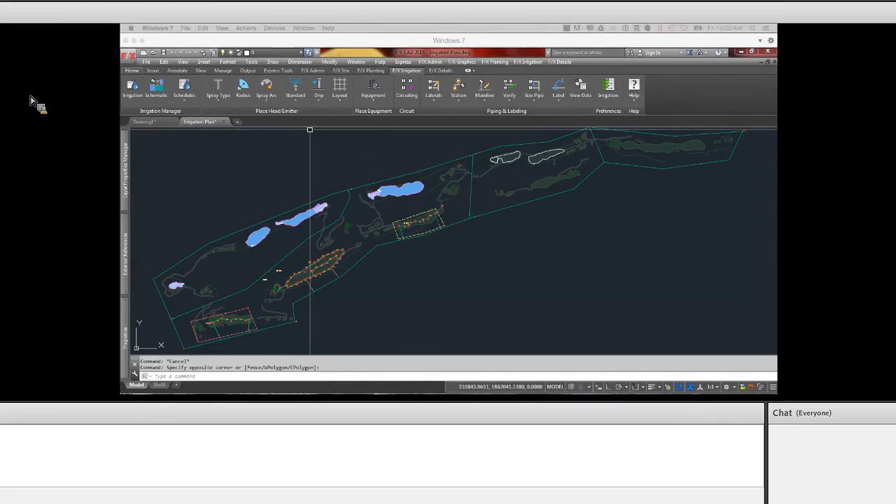Hope you are ready for an exciting webinar on golf course irrigation. So we have a lot of fun things to show you on how Land F/X can handle golf course irrigation. I see a good collection of skilled designers here ready to watch.

I really appreciate you guys tuning in and sharing with us, because of course we do require a lot of input from y'all. We have the notable handicap of never actually designing a golf course irrigation, so it's been a lot of interacting with designers, and when you have someone right in the same room with you, there's so many hundreds of little questions that are really necessary to really fine tune it. So I do want to throw that out immediately that we're definitely going to be improving this even more, and we do need a lot more input from you.

But this is definitely representing a number of years of continuing to add on to our irrigation capability with the tools specific for golf irrigation. And as a lot of you know, it obviously does fit the bill, but we're going to really showcase the combination of tools and how to use them and how that all works. But do feel free to chime in with little questions there.

I'll be here. I even have a good number of golf jokes teed up. So as there are moments where Jake lets me, I'll do that. But enough of that, take it away, Jake. Awesome. You can hear me, right?

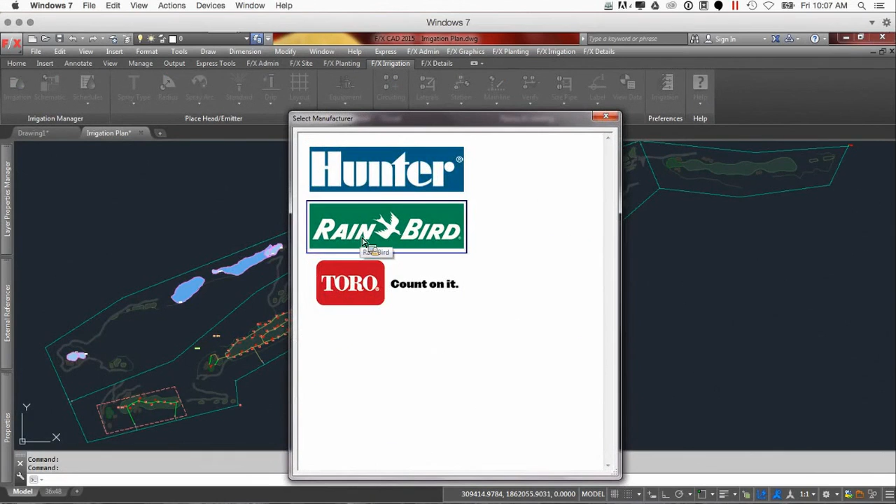So we're not going to go over exactly how to specify things. I think who we're talking to now completely understand what they've got to do in regards to that, but being able to have the power to come in and choose our valve-in-head rotors and specify the actual manufacturer and see what they have available for your golf course design.

And just like everything else, being able to click through and find the specific model that you need and go right to their website and right to their catalog for this stuff. Just bringing that power right to you so that you don't have to second guess anything as you're placing the stuff that you're looking to do.

So I've already added a couple of things here, so we're not going to add any new stuff, but we do want to obviously think about everything that we're going to need for this system. So being able to know that we're going to use valve-in-head rotors, putting those into your plan and placing them into your drawing. Land F/X sees those and starts to treat different tools differently, and we'll go through that as we talk about our lateral piping and shutoff valves.

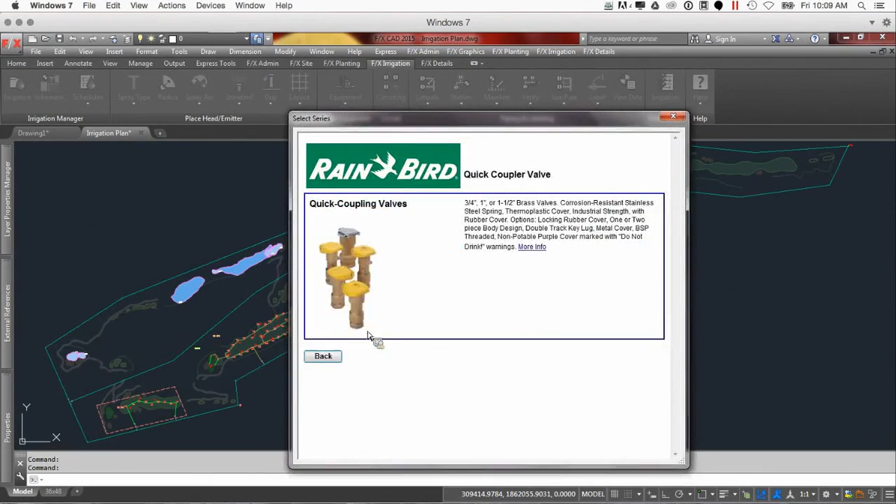But just know using those valve-in-head rotors does open up sort of this golf irrigation design door for the system that it wouldn't normally do. So definitely want to have those in our drawing. When we talk about valves, we can obviously add a quick coupler. I did not add one of those, so we'll just go ahead and choose one of these guys here, not too worried about what kind it is.

And then obviously we have the ability to have shutoff valves. And the shutoff valves are super important for this design, not only pertaining to maintenance, because when you're a greenskeeper or the person out there doing the maintenance, shutoff valves are extremely crucial, especially when you're breaking up this type of a main line and this loop system, being able to shut down pieces of the site without affecting the rest of it.

So understanding the need for these shutoff valves, and not only on the maintenance side, but actually as we get into sizing the main line, being able to toggle those on and off. You'll see the ability to have it open and closed, and what that actually means for the system and how the system recognizes that. We'll go over that a little bit more in a second, and then obviously just choosing the actual valve that you're intending on putting in.

So from there, we have our auxiliary equipment. We can add our controller if we have central control.

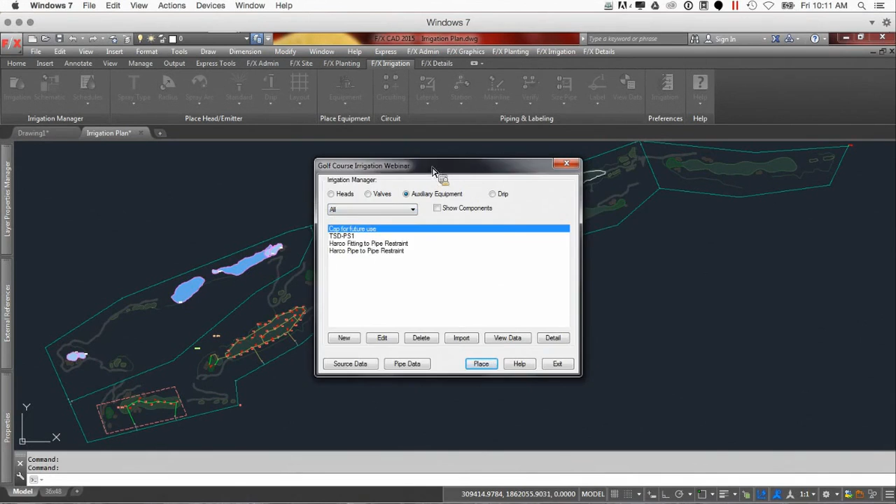Something Jared and I were talking back and forth about is we're going to show you how to use a combination of schematic irrigation and using caps in those first initial phases of your design. So you're not necessarily placing everything right up front, but just to give you a sense of what that main feeder loop is going to be handling and how we're going to size those things. Hopefully we can put a couple thoughts in your mind about how to do that.

So I've added a cap for future use so that we can place those around the drawing. I've got my controller, and then adding pipe restraints. So we have those restraint fittings, and you can see that we've got...

Right here, joint restraint fittings, and if we click new, you'll be able to choose from these three different options: fitting to pipes, and then valve to pipes. Depending on the scenario, I might suggest adding each one of those to your project, because you're going to run into different scenarios throughout the system that you're going to want to do.

I've just added the fitting to pipe and pipe to pipe just to show those off a little bit, but obviously showing components right off the bat, you can see what kind of options we have as we are connecting to fittings. We have the ability to hook them to T's, to 90s, to 45s, and then a couple smaller angles based on Harco's availability. So there's those guys, and then obviously pipe to pipe type of fittings connections there.

Jared's done a really cool thing where they actually get integrated into the main line, and they recognize, so you can pipe to them and fit them within, so they're recognized. We'll go over those a little bit more in a little bit.

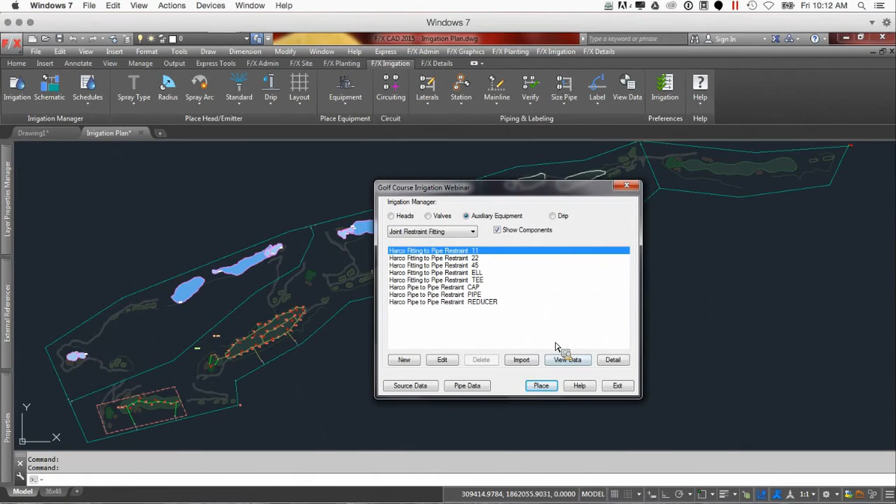From here, let's just go over what I've got thus far in the project so you can get a sense of what's going on. We've got our point of connection up here. We're just pulling off of a well, and I've got an entire looped main with a couple cross connections here.

So at each of these points, I have placed my gate valves so that I can turn off any one of those at any time. I haven't placed them here just so we can place them.

Right off the bat, I am going to place some of these so that we can see. We can place them either open or closed. You'll notice that once I click it onto the main line and set it on there, it recognizes it and it actually hooks it into the system. So it does weld itself in right off the bat, which is actually pretty slick.

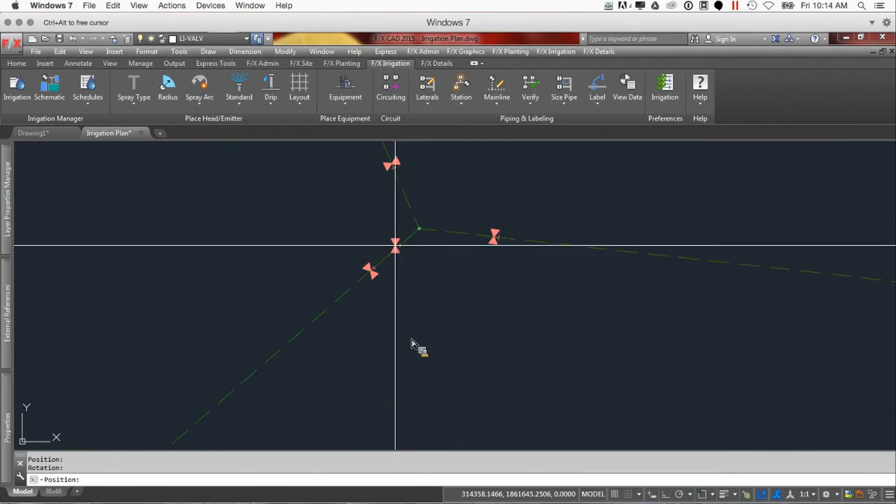You don't need to place them first. You can actually place them afterwards, and they will hook themselves together. So that does make it really, really nice. We can place a couple up here and just get them back into that system, making sure that we have all of our connections there.

You'll notice that I have placed these gate valves not only on mainline, like our actual main feeder line. But you'll also notice that I've got gate valves going to each one of these fairways. And the really, really cool thing about this, Jared, you can explain it a little bit more.

I'm going to do my best shot at explaining how you explained it before, but the system doesn't know exactly what you're intending to do. It does not have eyes, and it does not see that visual representation that this is a sub loop and you're trying to size this a little bit differently. It only knows the difference between mainline pipe and lateral pipe.

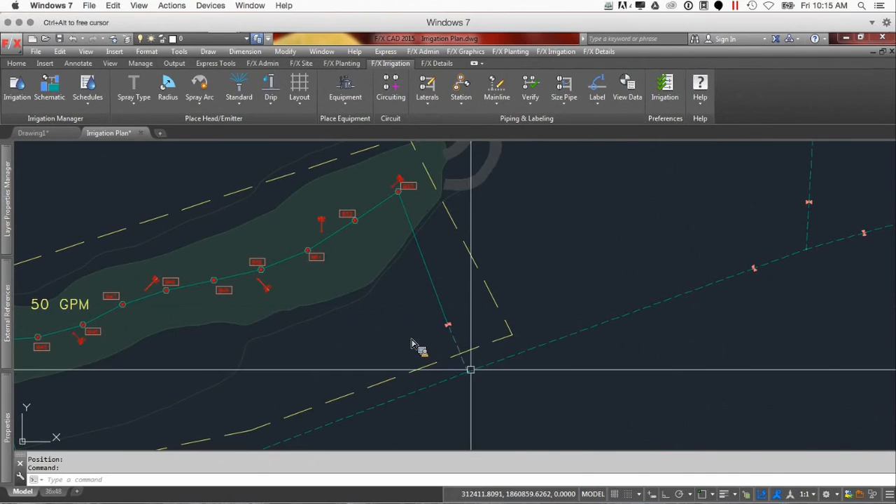The way that Jeremiah was able to figure this out, or let the system figure it out, is pretend like the system was blind and using Braille. So it's feeling along these main lines, and it will feel these different gate valves, and it'll feel just past them and see that it's actually different material, so it'll actually stop.

Because what it doesn't want to do is take out all instances as it's sizing these lines and continue to go through these unnecessary paths. So it's actually stopping at these certain points and then doing different calculations within the system and placing them at a point where it can grab that information and send it back appropriately.

So it's actually really, really cool, how it's actually processing through that.

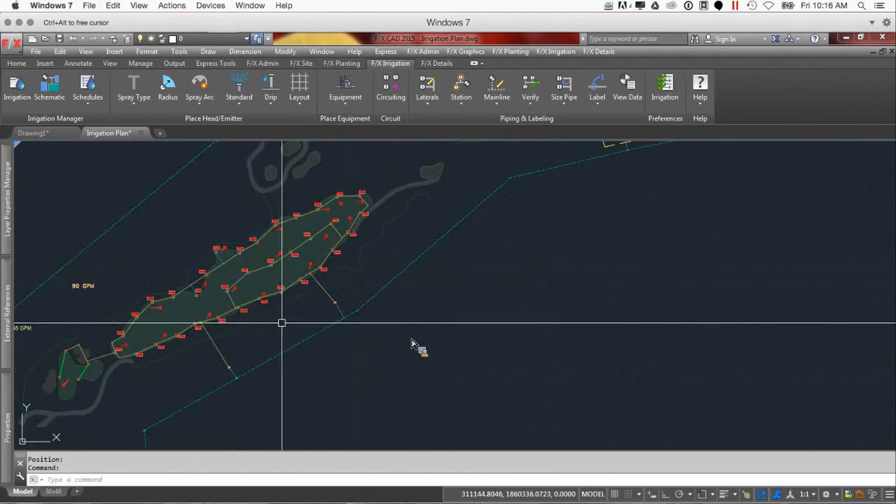So making this irrigation design as we would normally see it, where we've got two main feeds into this subloop here, we've placed all of our heads and connected them to lateral lines. We want to make sure we put gate valves or shutoff valves in our two locations so we can split the flow accordingly.

So I am going to leave that at that. Jared, do we have any questions up until now? So far. All right, cool.

So we're going to drop in a flow zone here. I've already put one in, but I'm going to show the power of these things just right here real quick. So to get to our flow zones, we're going to do that in our sizing mainline tool.

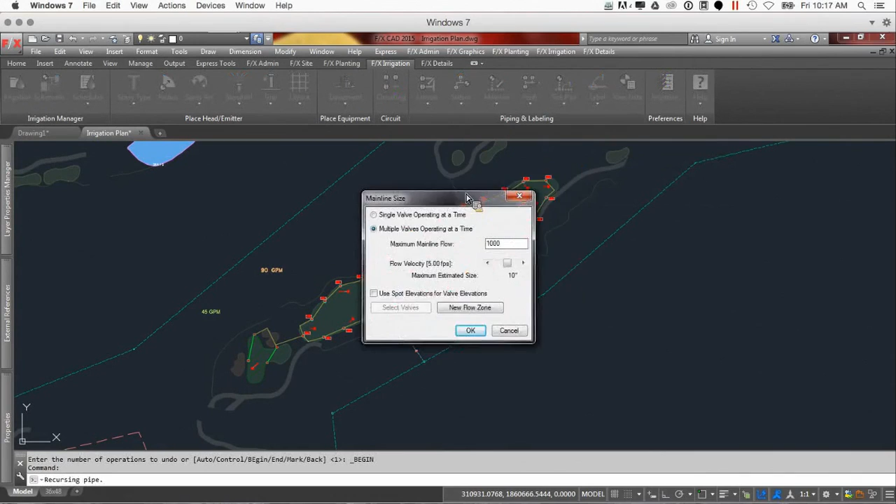When we go to our size mainline, we're going to have the option to select a new flow zone. What this flow zone does is let you put the max flow you want to limit this area to. Flow zones do not create flow, they only limit flow. And a step above that, they actually only limit flow if the flow in a given area exceeds that of your flow zone.

So if you have an area, for example this right here, that has let's say 30 GPM total in it, and you put a 45 GPM flow zone around it, it will not touch that. It'll size accordingly to what your flow is through those pieces of pipe. So we only care about what the maximum flow is for a given area that you want.

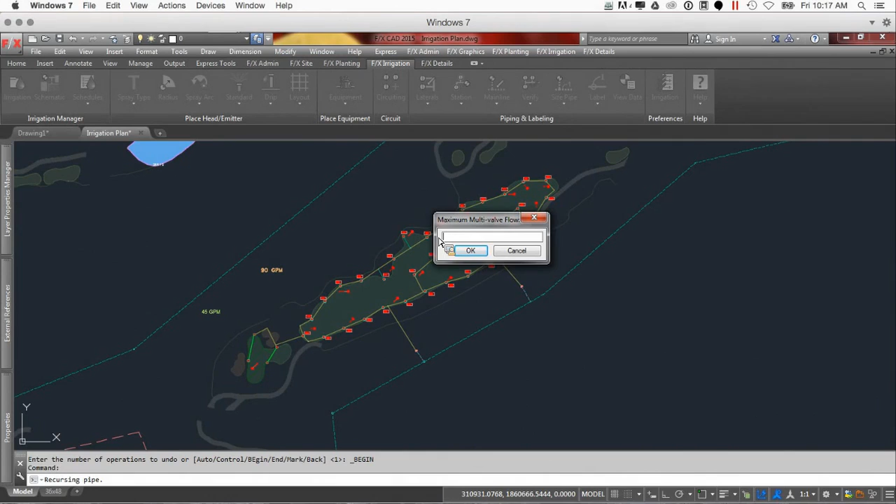So we will do, I'm just going to copy the same thing. I'm going to say it's a 90 GPM flow zone. And you need to make sure you encompass everything you want included in this.

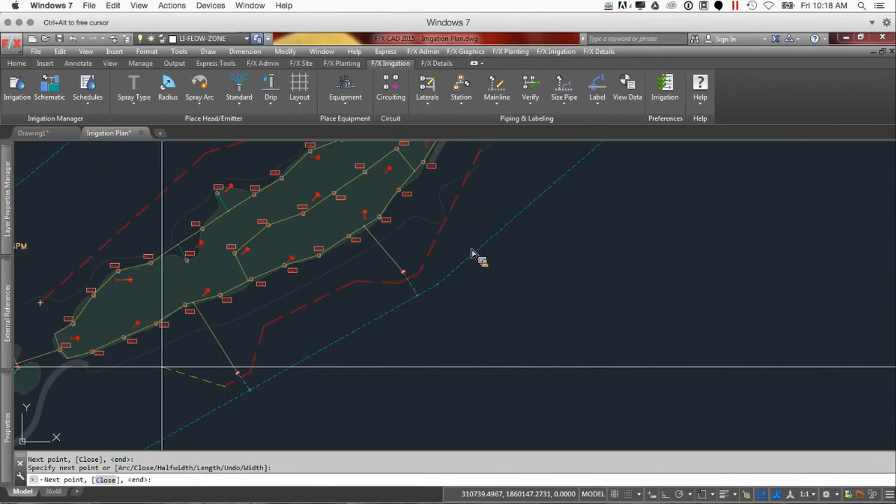What the flow zone is going to look for is both the end points of a pipe and the midpoint of the pipe. So as we come down into this area where we want to include, from the gate valve up through, but not necessarily our main feeder line, we can simply come around it just like this and include the entire length downstream of the gate valve, making sure that's all included, but just simply go up through and not include the rest of that main feeder line, and you are good to go.

So if I come across it this way, you're going to see that I can close it off, cancel so we don't size the line, but you're going to see that I got now a 90 GPM for this area. I'm going to do one more flow zone, we're going to give it 45.

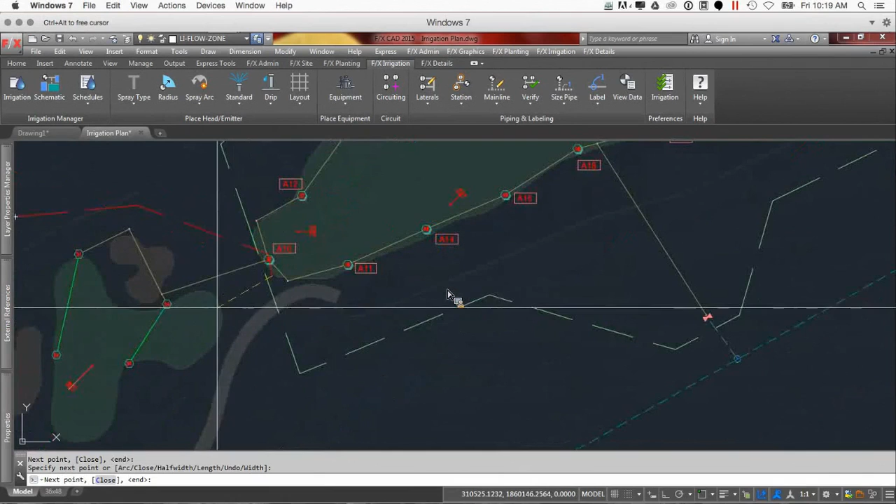And for this one, I'm actually going to do the opposite. You really don't want to overlap flow zones other than including some of the similar areas, but you can cross through enough to where it's actually recognizing the pipes that you didn't hit with the last flow zone.

So you'll notice that my 45 GPM flow zone will include this connection lateral or this connection main here, but not include the pipes that are within the other flow zone. So it doesn't matter that it's crossing through heads, but you can actually see if I select this, I've encompassed the entire 3 points of that line, which means it's going to be included.

So you do have to be a little bit cautious and meticulous about how and where you're placing those flow zones, but it does make it really nice that it picks up only what's within that entire area.

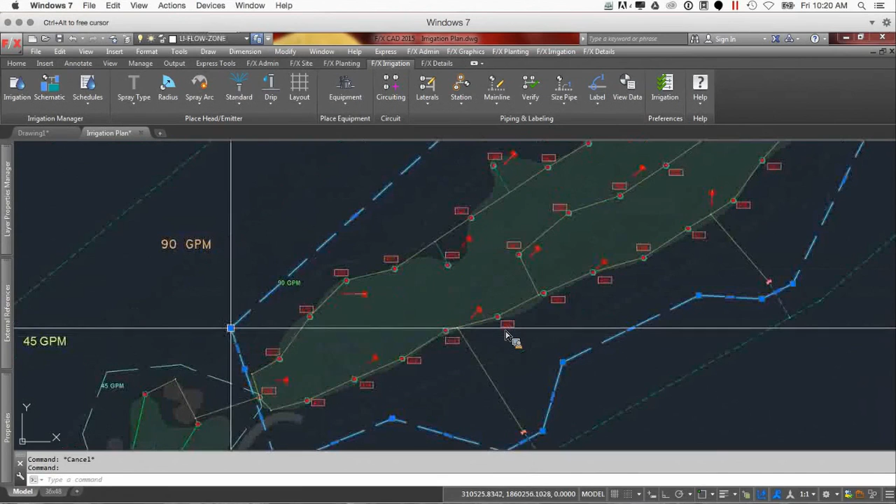So you are free to move these around however you see fit after the fact. Another really cool feature is that you can just double click into that text and change this to whatever you want it to be, and that's its new flow zone. So you don't have to worry about starting a new one or deleting this one to change it. All you do is come in here and change that number to whatever you want it to be, and you're good to go.

So now that we have our flow zones on here, the system's going to recognize that regardless of how many heads we have in this area or the total flow, we are going to limit it to no more than 90 GPM at a time.

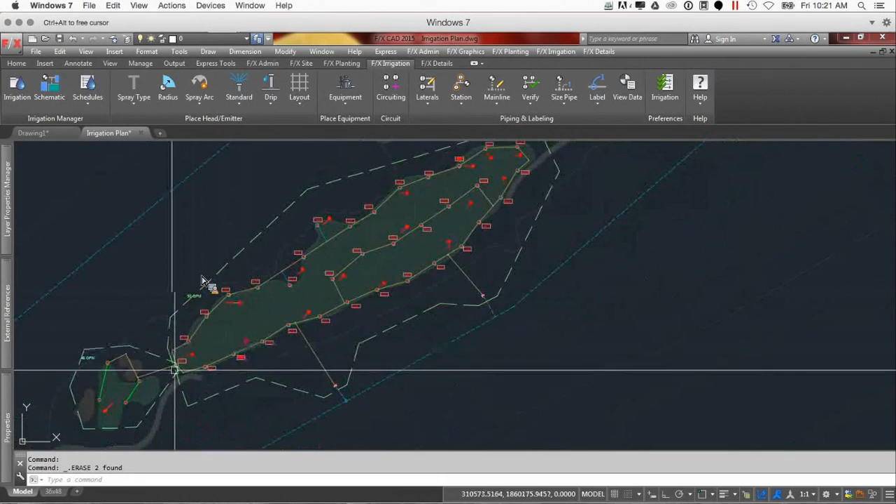So I can actually use my View Data button. I can click on one of these heads, and this is something that's probably already known coming into it - what type of head you're using, how much flow is going through a typical head, how many I can usually run at a time.

But now I can see that these are going at 23 GPM. So now you can start to think about how many I can actually run up until 90. So I'm breaching the 4 or 5 mark here. We know that at any given time we'll be able to run up through that many.

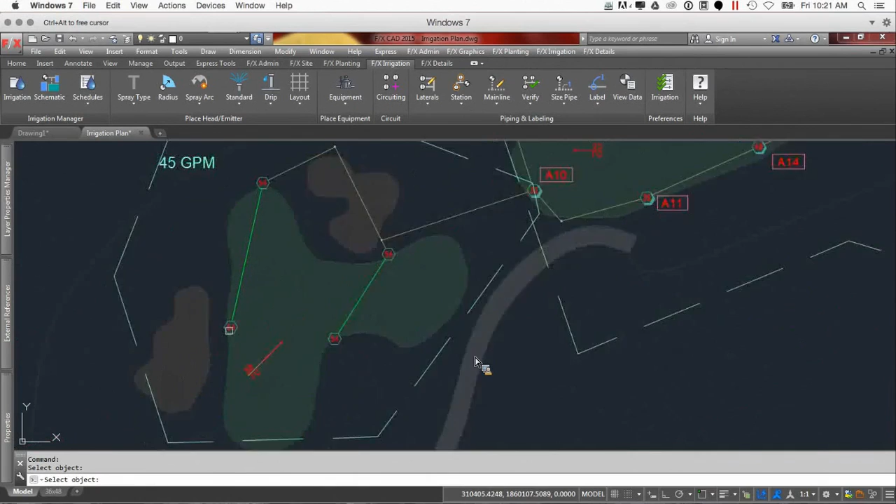So a 45 flow zone, I got 31 per head. As the system looks at this and adds the next one, that's already breached the 45 flow, so it's sizing it to only run one at a time here. You can really limit and force the pipe to be sized accordingly, and then we can worry about how those are going to run later down in our schedules.

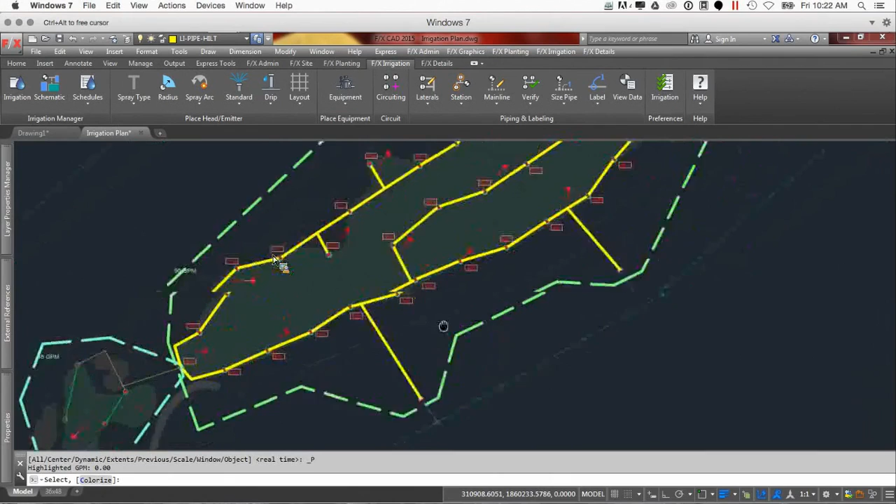So I've got my flow zones put across the heads that I've placed already, and the other feature of that flow zone - using the highlight station tool, you can click on a flow zone and it'll show you what's included. If you're ever worried about what's actually included in instances like this, simply click on that flow zone and it will highlight everything that is included. It makes it really nice for a quick check to see what you got going on in there.

So from here, we're going to talk a little bit about placing a couple heads so we can go over the difference between mainline and lateral line here. I'm actually going to place it from my rotors, and you can see that I got all my different nozzle choices.

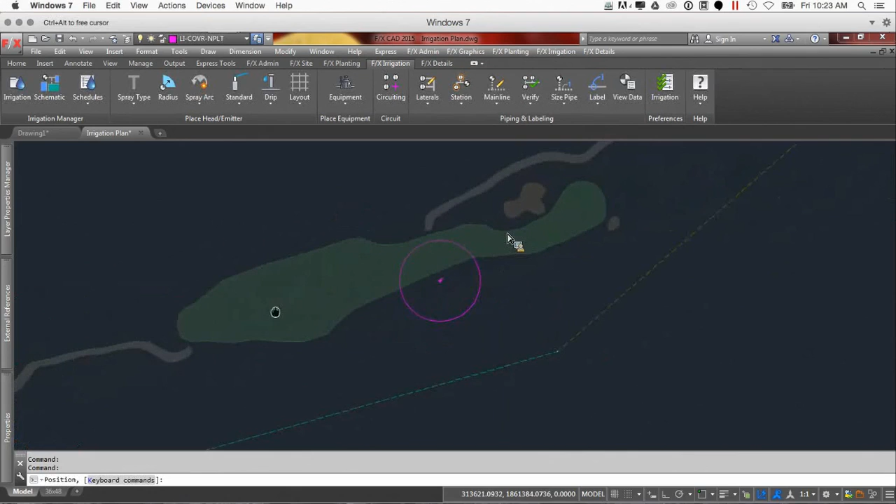This specific one - these are all fulls here - so I'm just going to open up this guy by double clicking, and you'll see that I'm given that nozzle choice. Using my Q and E buttons, I can increase or decrease that nozzle size, and A and D to decrease or increase the radius, which are some of my favorite buttons.

So we're just going to choose - forgive my awesome design skills here - but we're just going to really quickly do a one row design across here by quickly placing them.

The other thing to think about, as we're going, just general rules of thumb - think of this design stuff just like you would any other type of irrigation system, and zoning is definitely crucial. Being able to water the greens different than the fairways is something that should be thought about. Head placement is definitely different when it comes to that.

So I'll grab a different type of head that I can actually do some varying arcs on, and simply place them here and around the greens so that we have somewhat of a better representation of how that would go. So we'll just place a couple more.

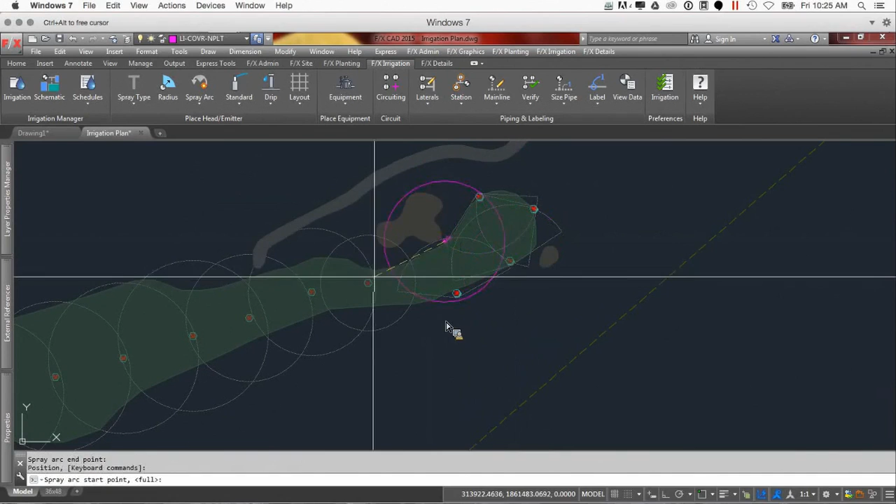So now essentially when we've done this, we do have to consider our flow zones for these different areas. We want these potentially running at different amounts, so we could place our flow zones as such.

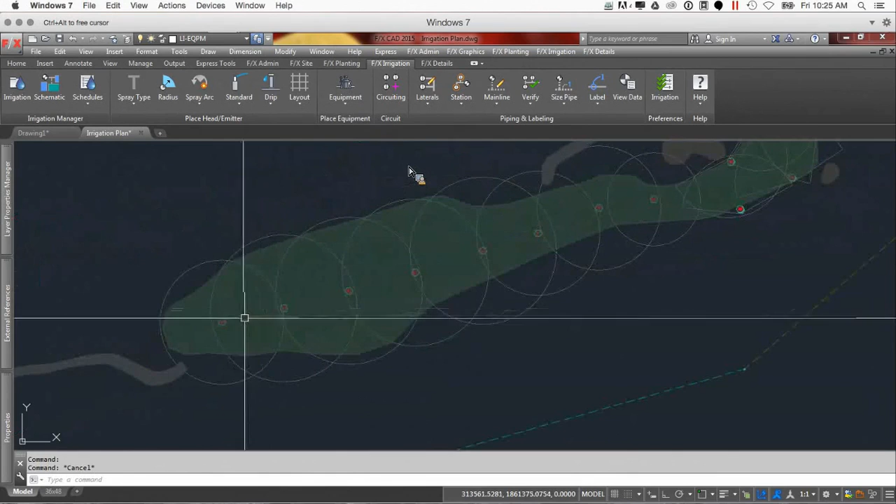We're going to just pipe really quick. One of the cool features - as you place that valve-in-head rotor, you can actually use lateral pipe to hook these heads together, and it will be considered mainline. So we'll just use our lateral pipe function. I'm going to go from here, and cheat a little bit using the H command to have head snap on, and just drag across all these real quick.

So when it comes to an area like this, we can figure out what we want to do. I'm going to just pipe around to it a little bit like this, and we'll pipe back onto it.

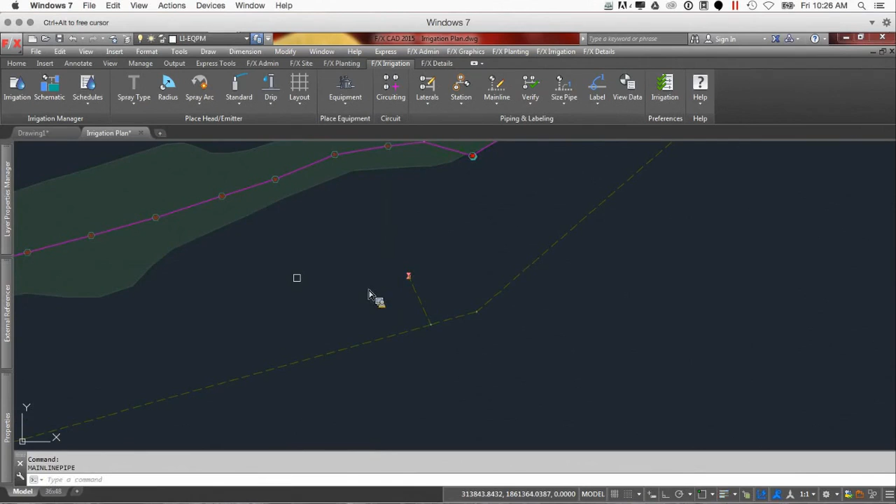Now we're going to have to put in our gate valves here, so I'm going to plop on some gate valves really quick - I'll place one right here, and one right here. When we pipe this stuff, we want to bring our mainline into the gate valve, and that's going to be able to assign that gate valve that threshold or gate into our lateral connection here. So the system's going to see that as different once we actually connect that. And I actually missed the mark there.

And connect it in. So from that point on, the system's going to know to treat this a little bit differently and overlook it for the main feeder line. So we're going to connect that last one in here, and we'll bring him in.

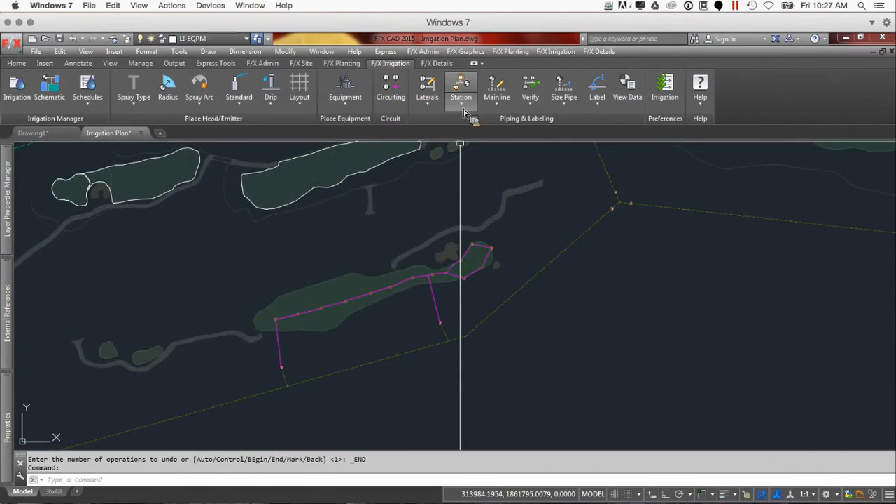So now when we highlight this station, you're going to see that it only highlights up until those gate valves, which is pretty slick. It'll show the main connections in blue, in cyan, and if you highlight the rest of the line, it's going to bypass those sublines and treat those a little bit separately. So it's just an awesome cross-check there.

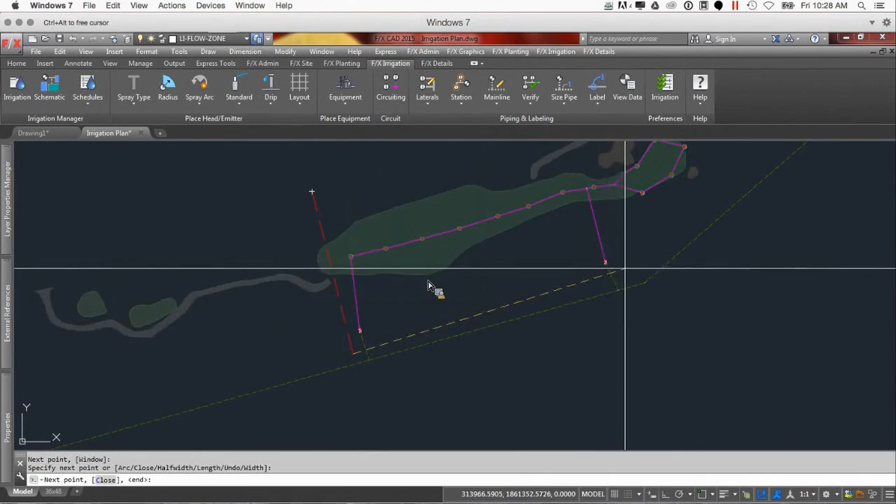So from this point, we can drop in our flow zones if we'd like, size our main line, choose flow zone, and based on the parameters given, we can assign 150, and include this entire thing. I'll give that one 45, and we'll just drop one here. Again, keeping in lieu of this, we'll just go around that guy. So now I have my 2 additional flow zones.

So we could stop here, but for time's sake, I'm just going to keep going unless there's questions. All right, cool. So what I've done for schematic, we just showed placing those heads, how to use the lateral pipe command and stuff like that. But what if you didn't want to place all the heads yet?

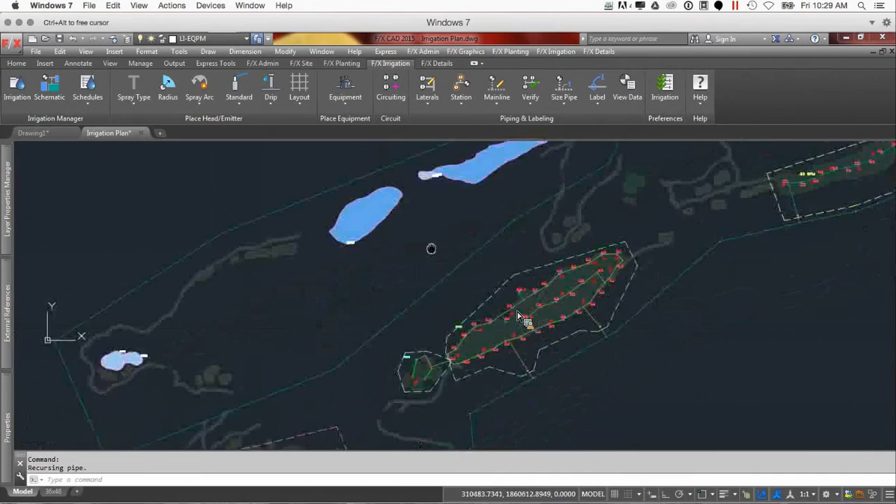We came up with a slick little way to at least account for some stuff. I obviously ran a valve schedule to see what my precip rate was for these given areas, so I had a relative precip rate I could use. Our schematic areas allow you to add different irrigation zones. So I added a couple different scenarios, depending on how I wanted to water the greens versus the fairways, and whether I wanted a couple rows of sprinklers versus just one row. I've got him with his specific precip and a set pressure, and I've done that for just a 1-row as well.

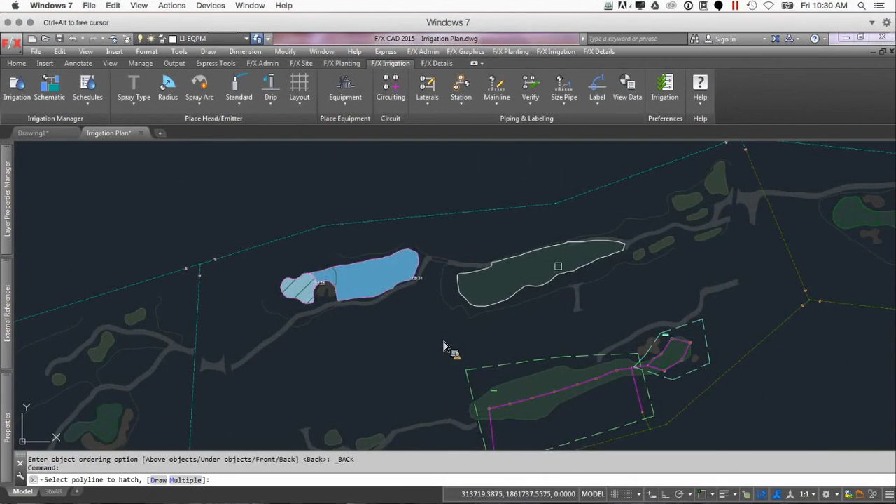So I can now go ahead and place this stuff in these given areas, and it should respect that and drop in a flow. So now if I come into these bigger areas, I can grab my other guy and go ahead and place him. Without clicking any more than those 3 times, I can start to get a sense of how much flow is going to be required for these areas. So that alone is pretty cool.

But now how do I turn that into the ability to size my main lines accordingly? Since schematic is not recognized without valves, we can't just hook this to the main line. However, we've talked, and it would be kind of a cool feature, so I'm going to let that up to Jer's brain.

But what we're going to do is actually place a cap. So we're going to come up to our equipment and place one of these caps. This cap, and caps also won't be in the valve schedule or the runtime schedule, but what it's going to do for us is it's going to be pretty much like a flow zone. So the cap isn't going to reflect the entire flow of that area—the cap's going to reflect what the flow zone for that area would be.

So for example, I'm not going to place it yet—let me show you this little nifty trick. With highlight station, if you highlight this sub main right here, it's going to show us what's all connected, and you'll see down here in the command line the total GPM for that area. So we can start to get a sense about what's going on through that area. I got 910 GPM going through there.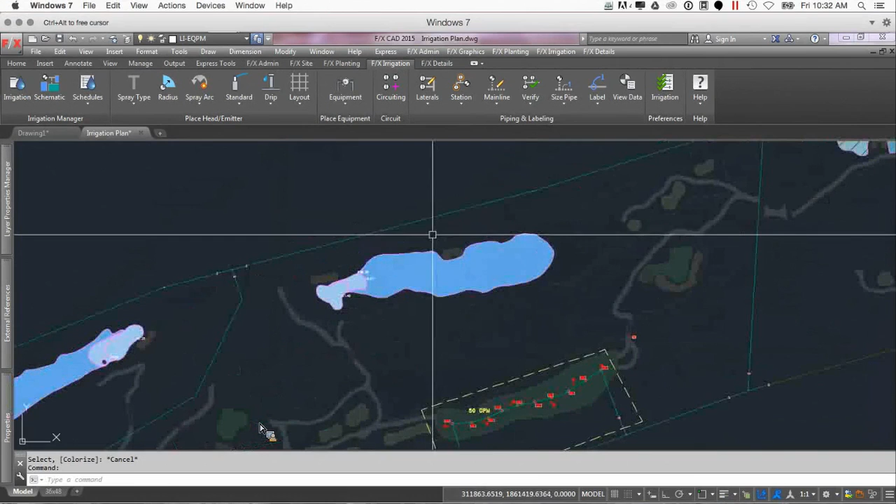So as we look at these different areas, we can start to get a sense of if we're close to the same, what my flow zones were for that area. So I'll stick with the same or similar flow zone amount.

And if I just simply place them in here, since it's not going to matter, we're not doing a looped here, we're just connecting from our main to this cap, I can actually place them just outside. That should be okay. But we'll go 85 for our flow zone here. And the pressure we'll set at whatever the design pressure is for that type of head, and we'll place them in. From here I can place my valve for my isolation valve,

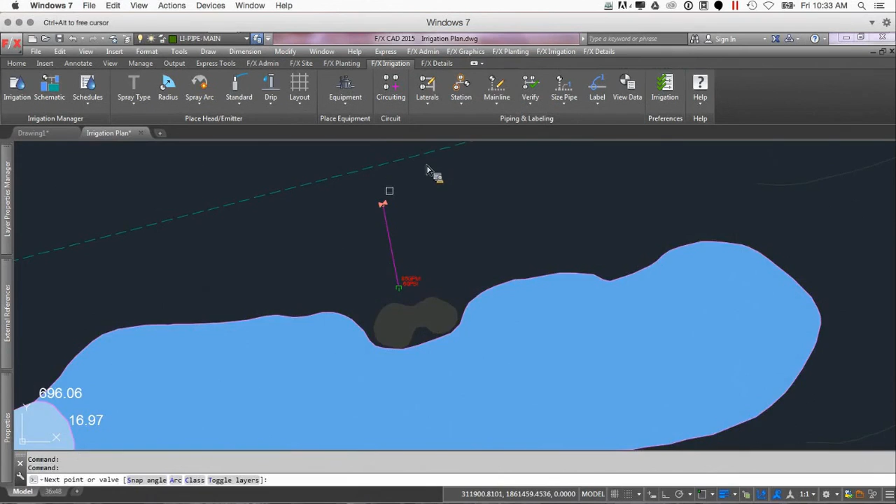and now I can pipe to him. So essentially it's a lot simpler: just pipe to one thing, pipe my valve to my main line, and now essentially I have set up for this entire area what this will be representing right here. So we at least get our demands that will feed the main line, so the main line should size just fine like that. So having those in there, we can go ahead and place other caps in.

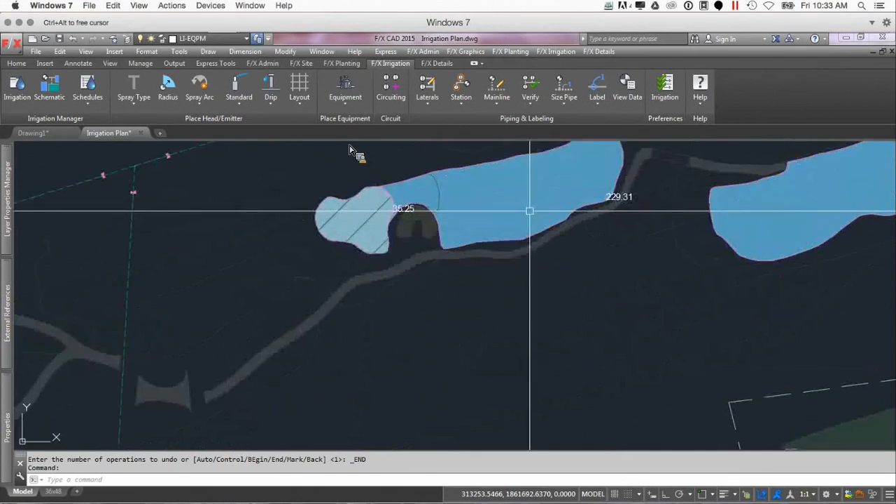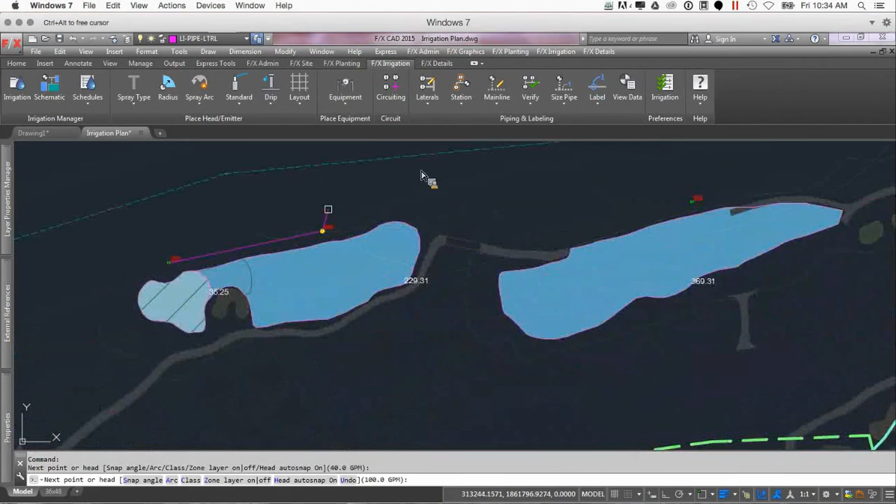Obviously placing the caps, I think the easiest way to do that would be to simply place the cap, put in your flow, your pressure, and then copy before you pipe. Copy that guy around to any of these specific areas that you've got going on here, and then change that flow just by double clicking on it and changing it to a more appropriate amount for whatever that given flow zone is that you want. So we'll go just like that, and now we can pipe to these different areas and hook those all in, and it should be a pretty accurate representation. So let me quickly do that.

So while we're on the topic of placing valves and stuff like that, the quick coupler valve again is kind of a neat little feature. The quick coupler valve, if you place it on the main line, and I'm talking about the actual main feeder line, since it doesn't have a flow or anything assigned to it, it's going to actually assign the minimum size pipe as it sizes the pipe to it.

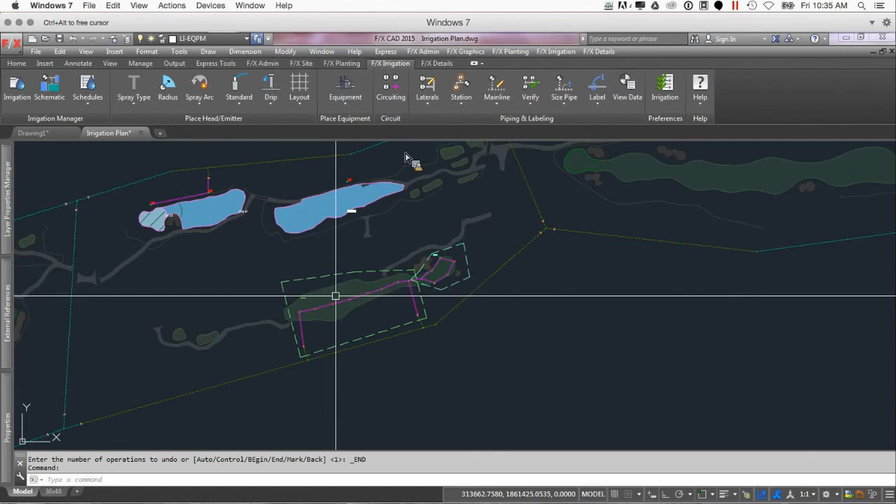But you can also connect it within one of these flow zones to a lateral pipe. The lateral pipe typically wouldn't be able to handle a quick coupler because they're a valve and they go onto the main line. But since we have the ability to treat this lateral line as main line, it will allow it to be placed so that we can actually put those quick coupler valves in the system right where they're supposed to go, and they will give the minimum lateral pipe size to those if we pipe to them.

So pipe those guys real quick. Pipe that guy real quick. So this is going to sort of complete us. I didn't add a valve there. Let me hurry and put him in.

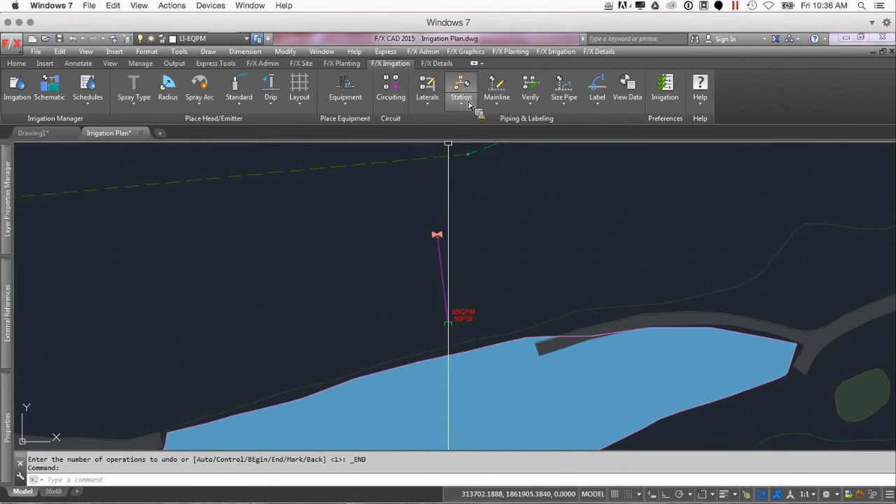Now, I'm sure everybody's used the quick coupler, or not the quick coupler, sorry, the isolation valves, and knows that you can use our view data button to be able to turn this on and off, or open and closed. Now, going through an entire site, an 18-hole course, or even just a 9-hole, but more valves in general, it's going to be a little time consuming to go through and click on each one of those and close them all and then open them up as you need them.

I think I even showed Jared this. He didn't even recognize this, so I'm gonna take credit for it.

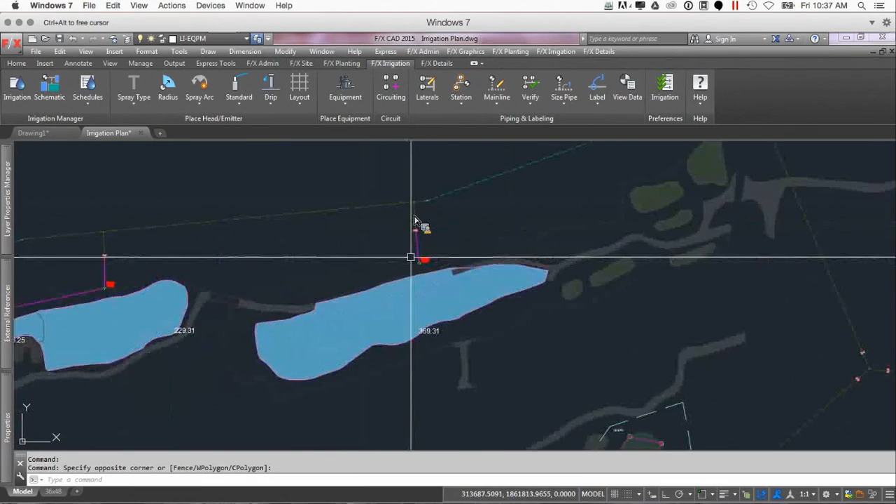But being able to use your match properties for this is a great time saver. So what I'm going to do, just for the sake of this example, is I'm going to show this guy closed. And I want to close everything up except for one specific loop. So as soon as I say close to that, he actually turns a different color. That's super handy to have a visual representation, but I don't want to have to go through here and choose each one of those to close them, because I got, I don't know, a good 20 or 40 of those

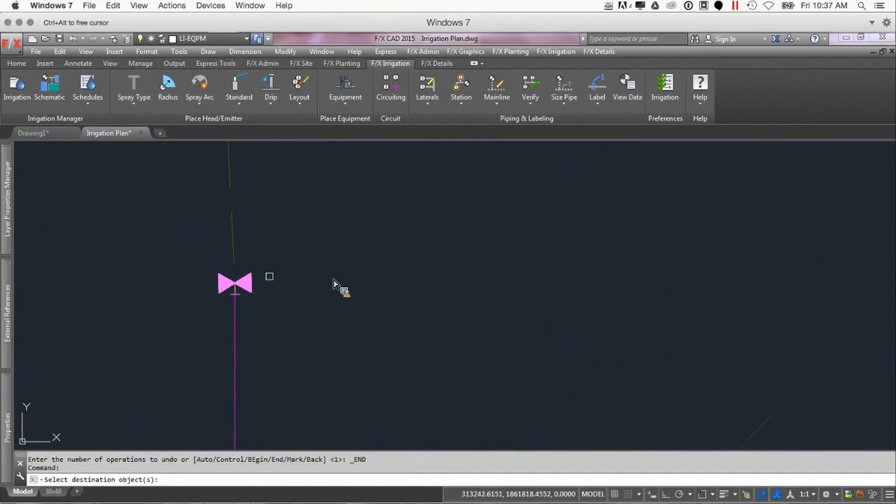things in the project. So what I can actually do is use my match properties button, select that source object, so I want it to be closed, and I want a destination object. And I just click on one of them. You're going to see that he turned pink, but I could go through and I could keep clicking on them.

Since I clicked on one destination object, I can window across this entire plan, and it's only going to recognize that isolation valve. So I just did all of them, and you're going to see every one of those is now off. In a matter of 3 clicks, I was able to do all 30 or whatever I have in there at the same time.

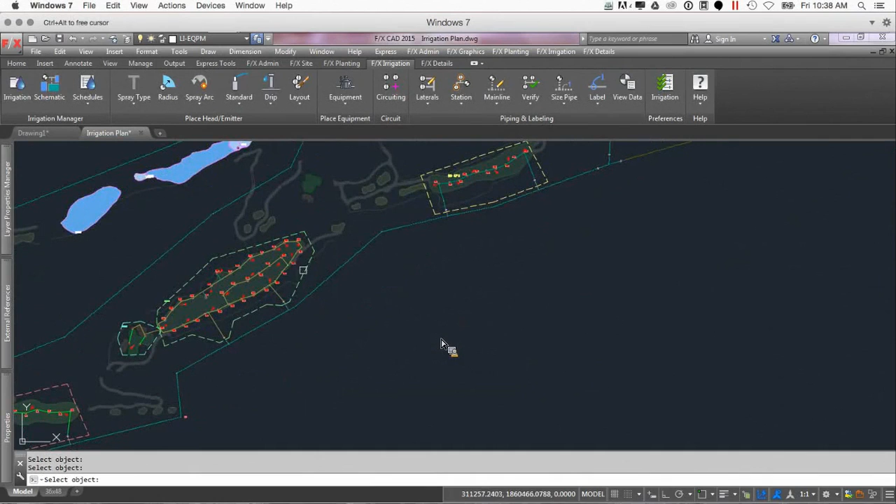Now it's a lot easier to just go into the specific zone you want open for running the valve or the main line, and open up those 2 valves. You can also use match properties again and highlight the ones you want open, so it goes both ways. I am, however, going to leave everything open so we can take a look at how this actually runs. Let me just hurry and turn those back.

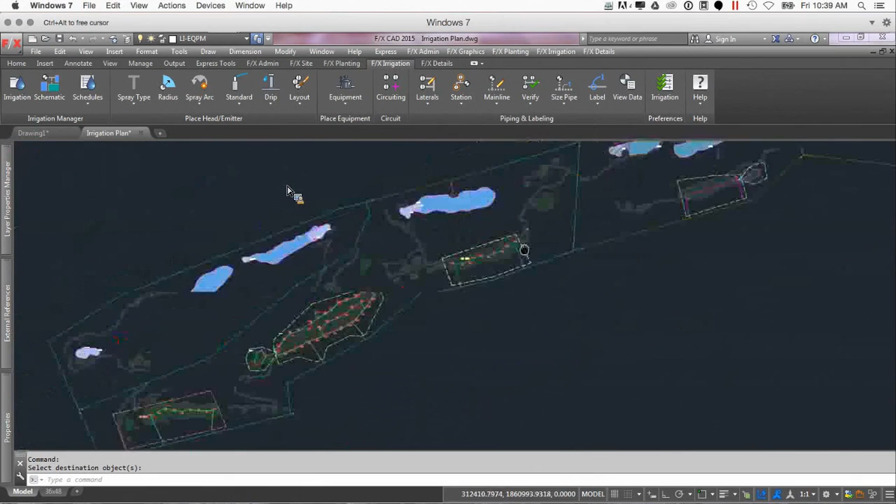All right, so the next tool, we've got our spot elevations in here. Something key to know is that if you have one spot elevation in here, and we use Land F/X spot elevations, we can't use any typical dumb elevation. It's got to have that data tied to it so it knows what to look for. But if you have just one elevation per hole or per fairway, the system's going to start looking.

Any equipment that registers that kind of stuff, so isolation valves, the heads, the point of connection, it's going to draw a circle around that thing and find the closest elevation and apply that to it. So for example, this guy right here, if I drew a circle, he's going to grow out, and it looks like his spot elevation would be right here at 49 feet.

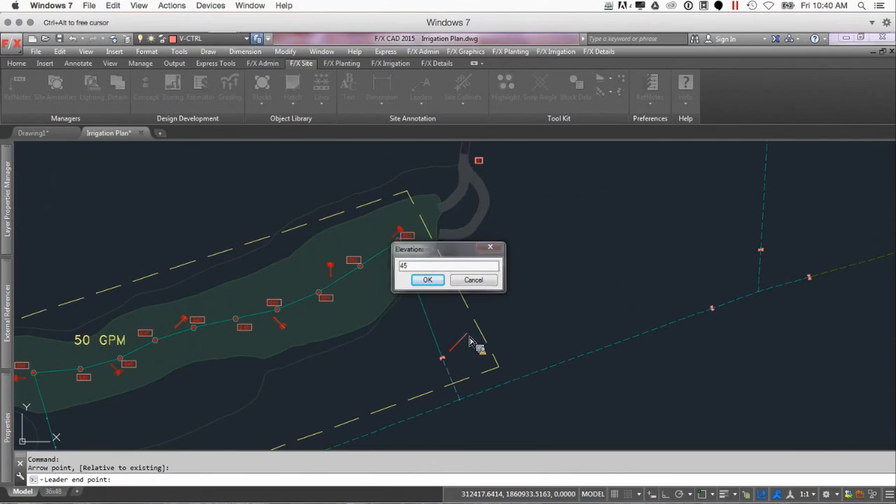So it is suggested that you are very liberal with your spot elevation placing at those key spots. Simply placing a spot elevation closer, having that be at 45 instead, will definitely help with the accuracy of the plan. So really hitting those throughout the whole plan is definitely a must.

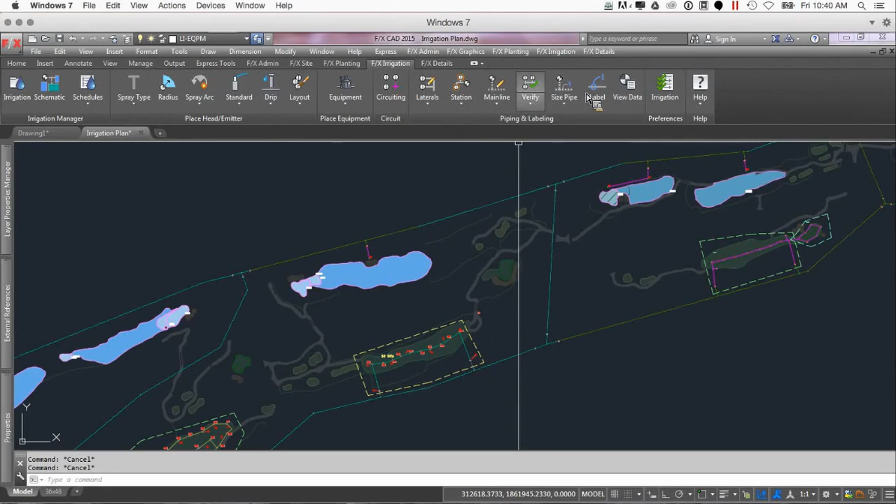So once I've got everything elevated or spot elevated, I can then use my verify. Now I do want to use that verify mainline so I can actually see what's going on, not only because it's the first level of error checking, but if you just proceed without it, you're going to get results and start questioning them. So starting from this verify stage is definitely a time saver.

So it does look like I've got some missing callouts, but everything's connected to a water source. Let's just take a look and see. Oh, I didn't call out those guys. Oh, and I didn't call out these guys.

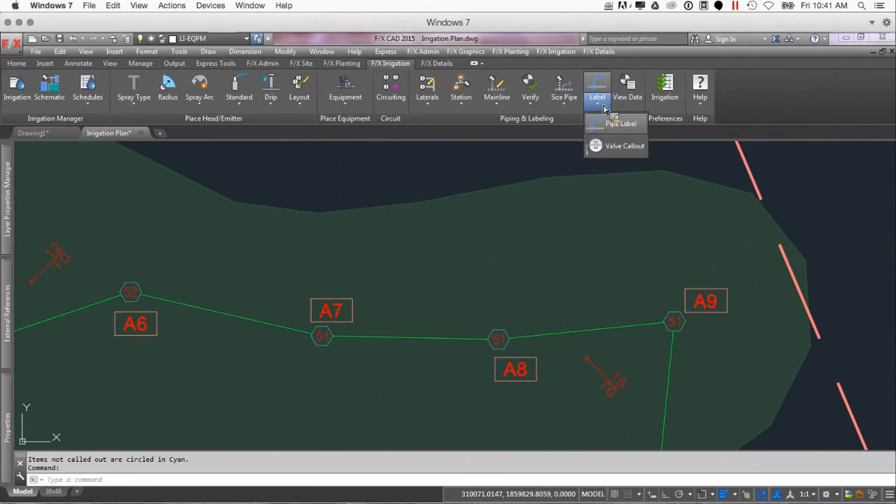So since these are valve-in-head, by definition it is one head with a valve in it. So how do we label these things? It's pretty cool - this was my first time labeling them, and I realized it's not like a normal valve callout, but you use the valve callout button. It's going to work just the same - you click on the actual head, since it's a valve-in-head, and it recognizes what we need to call it.

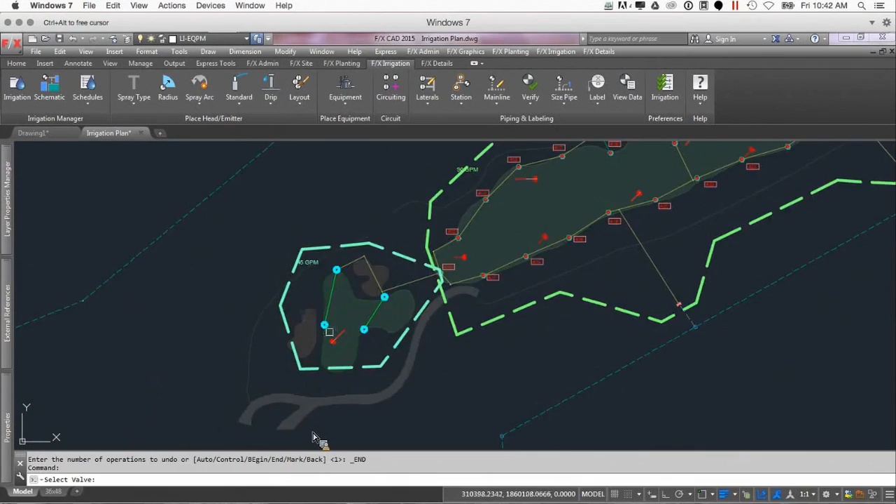Now, I did do this on purpose so we can show this feature off. Just like our regular valve callouts, I've gone sequentially through here - the next one should be A9, or A10 here. I got 9, and should pick up with 10, but I actually skipped over them and started here. So it does have that same great feature where I can simply click on it and say A10.

And it gives me this message that that's in use. If I want to duplicate it or increment, I hit increment, and you'll see once I place this guy right next to it, it's not going to give me the arrow style - the plans here will just get super messy, but it lets me drop it right there. You can see everything else switched from there. So I can continue through and say A11, hit increment, and place it. It makes it super nice when you make those little mistakes to have that option there.

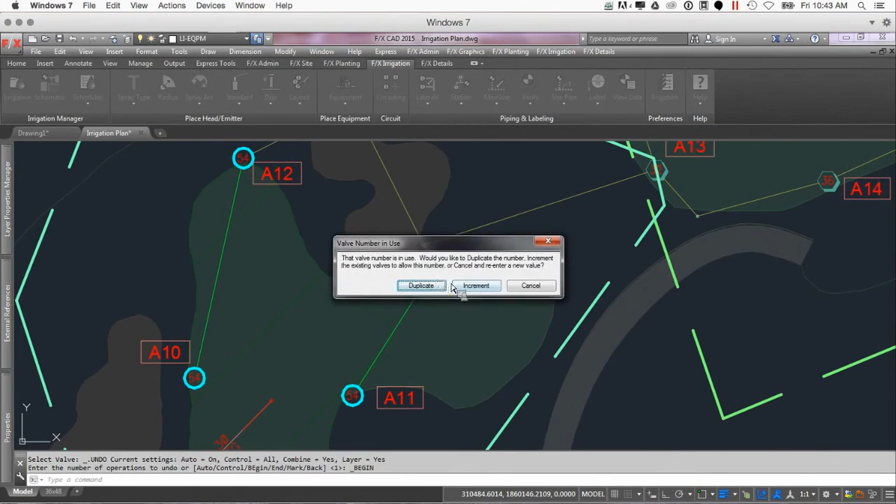So once I get this here, increment. All right, so it looks like we're good there.

And I ended at A47. Now I am jumping across here, and you're going to see that I did initially end with the next number, but I am switching controllers here because golf courses have scattered controllers across the site and large runs. So I did want all of these valves on a different controller. However, I did leave off now here at 47, so I do want this to be 48.

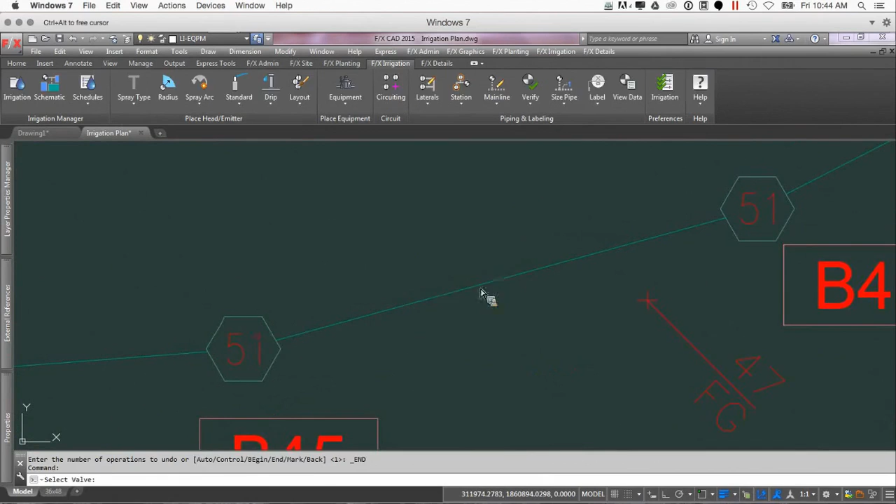So all I need to do is call this one B48 and increment, and that should have gone. Let's try this one. Increment. Interesting. We'll have to take a look at that. I was hoping it was going to increment my stuff. So we'll move on from that. We're going to just leave these guys called out for now.

But you're going to see I'm going to click on my size pipe. Now here's the next thing. We never actually went over this, so I guess now is the best time than ever. Go to our source data. In our irrigation manager, under source data, I have set up a pump station and well where I know my max available is 1,000 GPM, and my pressure is at 160. So I know I got a lot of flow, and I got quite a bit of pressure here,

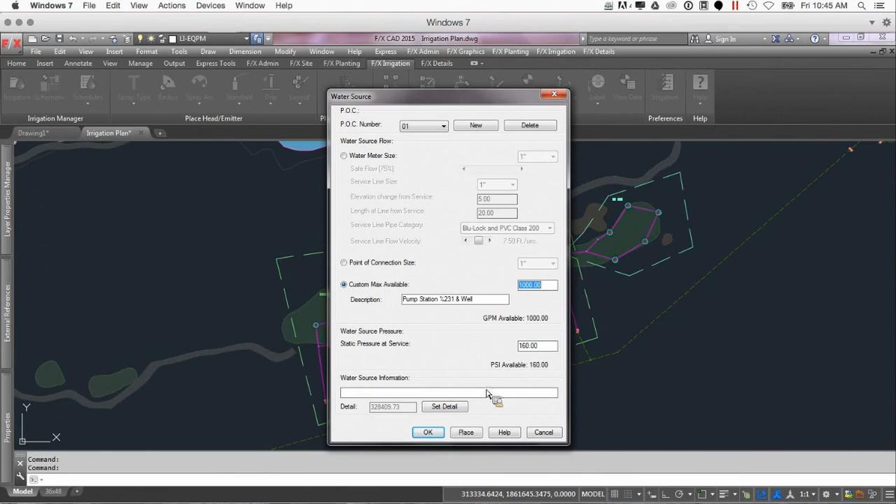but also it's a big site. So just knowing that overall flow that you have available, we are assuming that we're running multiple valves at the same time. Since they are just single heads, you know that you can run a couple heads at a time. We do want to say we are going to max out at whatever our available flow is. We want to just try to get as much out there as possible by putting that there.

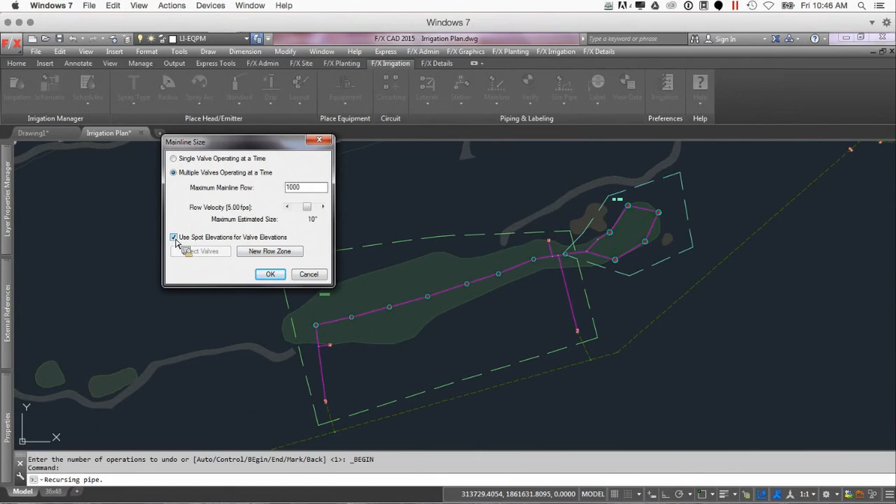However, we are using flow zones, so it is limiting the flow to those specific areas. So it's not going to just size everything at the 1,000 gallons a minute. It's going to size it based on what we've restricted it as. So this is going to be that powerful feature of that main feeder loop versus our sub main laterals. So the option to use spot elevations, obviously we want that, and we're going to hit OK.

So this is going to think through. It's going to recurse. What I should have done is zoom out, and that'll be a lesson to me. It's easier, I think, for the system, Jared, correct me if I'm wrong, if it is zoomed out to its extent so that it doesn't have to do what it's going to do next. Is that correct? Yeah, that's right, because it'll be doing some zooming to calc the precip rates for each head. And so, as you can see there, you see how it zoomed to see that one rotor.

Yeah, that was actually in my notes to say make sure you zoom extent. So this is showing you what it does if you don't. If you simply zoom out so it sees everything, you'll just see what pass it's on and what instance of those different routes that it's taking. So it is going to take just a second.

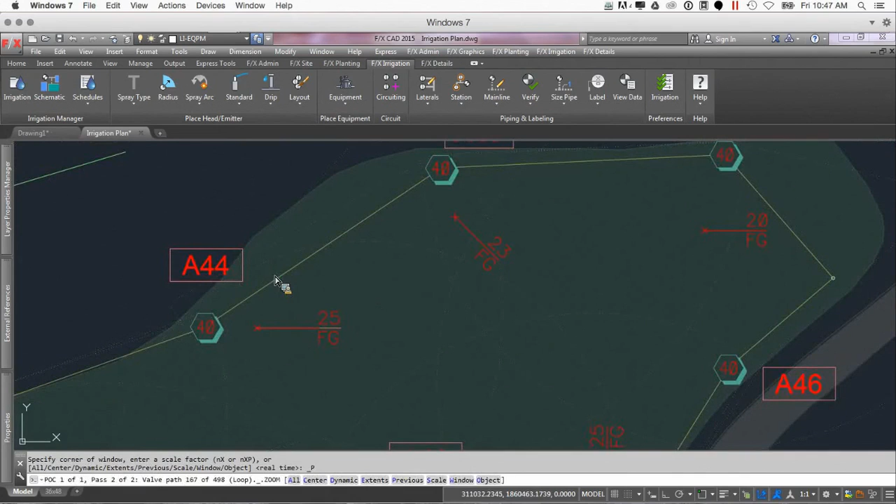This is a good time for a joke, I'm sure. Oh, you mean like when the guy returned from his golfing game, and his wife said, "What the heck happened? You look horrible." And he's like, "Well, Harry had a heart attack and died on the third hole." And she goes, "Oh my God, what'd you do?" And he's like, "It was horrible. You know, it was hit the ball, drag Harry for a little bit, hit the ball, drag Harry for a little bit." Yeah, I think we can go for one more. I don't know. All right. Well then, do we have any questions? All the other ones tend to be naughty, you know.

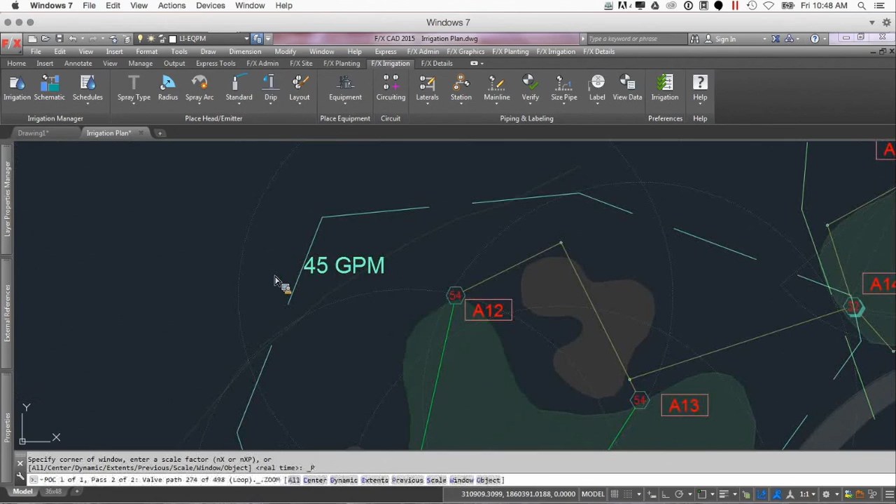But no, actually, Stefan has a great question. So he was wondering if the spot elevations can be in an XREF, and that's a great idea. I just never thought of that before, because we can certainly access the plants that are in an XREF. There's no reason we couldn't support having spot elevations in an XREF. And so I think that's definitely something we could add. We just want to get some sort of toggle, because a lot of things need the spot elevations.

We certainly don't want to slow down all of that by having them have to scan every XREF looking for spot elevations, which could take a very long time. So we would just need to ponder a somewhat intelligent way to do that. But I can certainly see how handy that'd be to be able to have your spot elevations XREF'd into your various plans. Cool.

All right, so here's what I was talking about, Jer. The system, and this I think is just going to be finessed in the code. The system's saying that you need to size lateral lines. There's actually no lateral lines that exist, because if you do try to size lateral pipes, it just doesn't do anything. But if we were to size the main line one more time, it actually will work. So I think it's just a firing it twice deal.

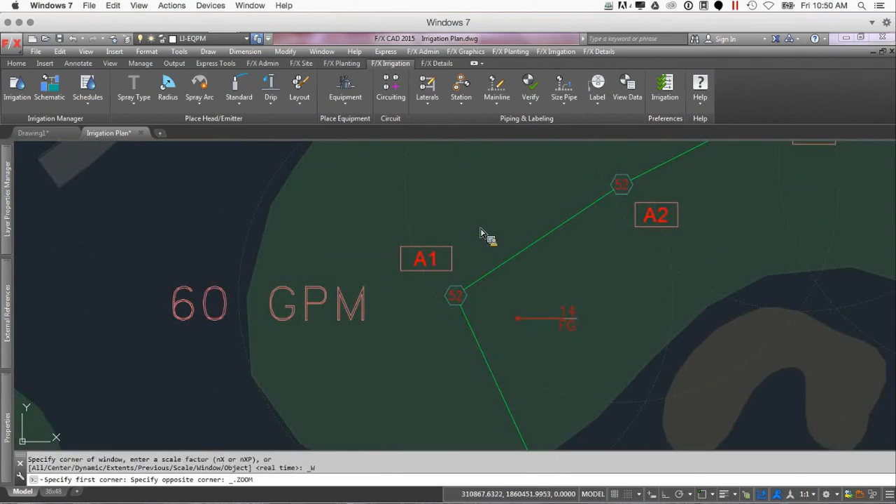Something like that, maybe you must have broken something. I clearly did. It is all my fault. So, let's see here. While we wait for this, no more questions, huh? I'm doing such a stellar job. You're doing a great job. Well, I got a little something to say. I'm better when I mute myself because I don't mumble, huh? That's okay. Yeah, you can mute yourself. I'll talk for a second.

So, a really cool little command, and this has nothing to do with the golf course irrigation stuff, but as we're dealing with plans, obviously XREFs are a big factor in keeping things clean and how we recommend working with your base files and stuff like that. I've come to love this little command, and for those of you who don't know it, it's ncopy, N as in Nancy, copy. And Amanda actually showed that in one of her webinars once, and I just simply loved it,

because what it does is it recognizes polylines and closed polylines in XREFs or nested polylines. So you can actually be in this current drawing, and the way I was able to do those schematic areas was type ncopy and click on one of those polylines. I didn't have to open the XREF or anything, and, hitting enter 3 times, it pulled that stuff into the current drawing. So it's kind of a really neat, fun little way to recreate boundaries and areas that are within XREFs. So that's your tip for today for that.

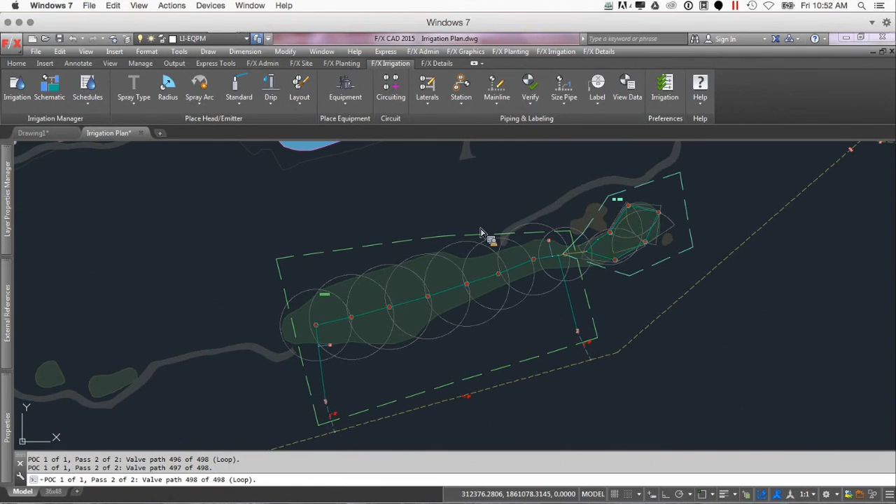So let's see here. Even the second time I didn't zoom out. I don't learn a lesson, apparently. All right, so this guy is struggling for this golf shot. He's in this big tournament, and the old timer groundskeeper is like, just shoot it right over that tree. You'll get there. So he's like, I'll try it, you know? And the old timer's like, yeah, I used to do that all the time. That's how I won the championship. Anyway, it hits the tree and goes in the water, and the old timer goes, oh, but that tree was about 3 feet tall back then. Huh? That's a good one. I hear everybody laughing. You're like, please finish sizing. Make that faster.

All right, so check it out. We obviously have a decent result here. Decent in that we have way too much pressure available for my little measly system. But you're going to see that its design analysis here is using that maximum flow of 1,000. Which means it's going to use it all, but it's obviously not using it all.

So pressure required at the critical station, we've got 68 psi going through the main line, and now it's even recognized that we're gaining 6.5 pounds from that POC down to the valves or those heads. I don't have a backflow, so I'm not losing anything there. So I've got a very big pressure available, which means one thing: I either get rid of some of that pressure, or I better make sure I have joint restraint fittings on everything, because that's a lot of pressure to have left over. And pressure reducing valves, you name it.

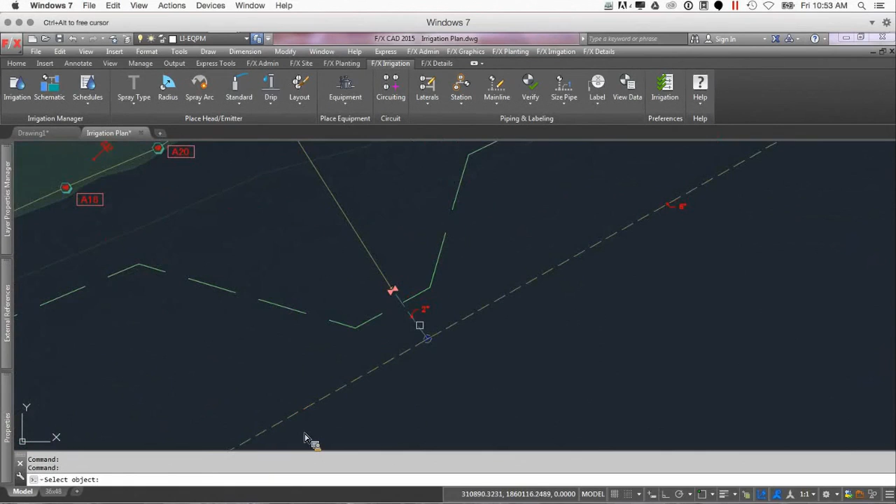So you'll notice that we now have a sized main loop, and it seems pretty consistent across the board that it's sized at a 6-inch. And you can see, if we were to use our view data button now, clicking on any of these T's coming off into this area, a GPM of 45, and this one should match a 45.

And that's because it knows that this is a 90 GPM flow zone here, and I've got two sort of a loop system into it, so it's splitting the flow real nice and even, and it's giving me that consistent flow across the entire loop, which is pretty slick.

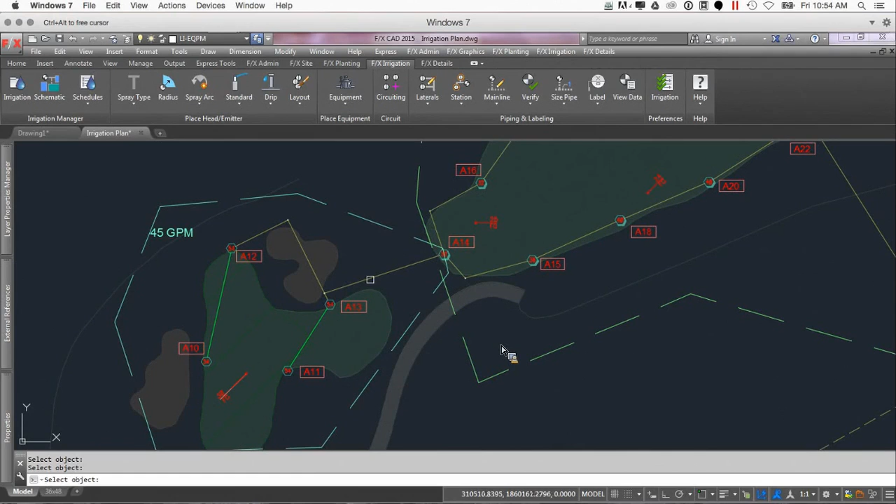So when you come into these areas, the reason this flow zone is important, why you wouldn't put it in with the same, is because this is a loop - it's actually treating 45 coming this way and 45 coming this way. So if I didn't have this 45 GPM flow zone here, it would be sizing this guy back up to 90 GPM. We're definitely going to want to keep this consistent with the rest of the system, and that's why we've forced it back down to use that right there. Pretty nice.

As we're coming along here, I've got 60 GPM, so it's going to split the flow 30-30. This is a great example too - I had 45 coming into these areas, but you'll see here I only have 23 GPM because that's all that's needed to feed this head. So it's sizing it based on its needs, not just on everything else.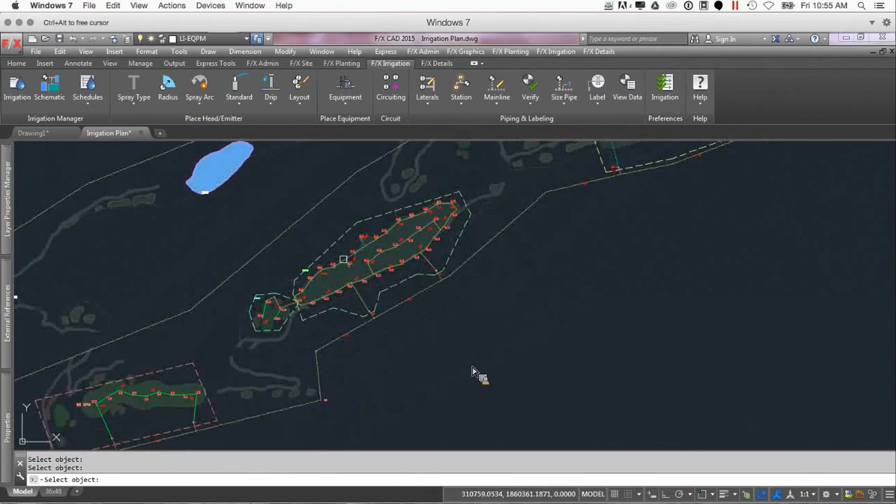You will notice, however, that it only gave me labels on my main line. It could get wildly confusing and error prone if it started just throwing sizes on everything else, so we leave that up to the designer to choose where they want. It already has a size associated to it, but you'll be able to drop in that label wherever you see fit for that design. So it doesn't make it that much more difficult, but it is that way on purpose.

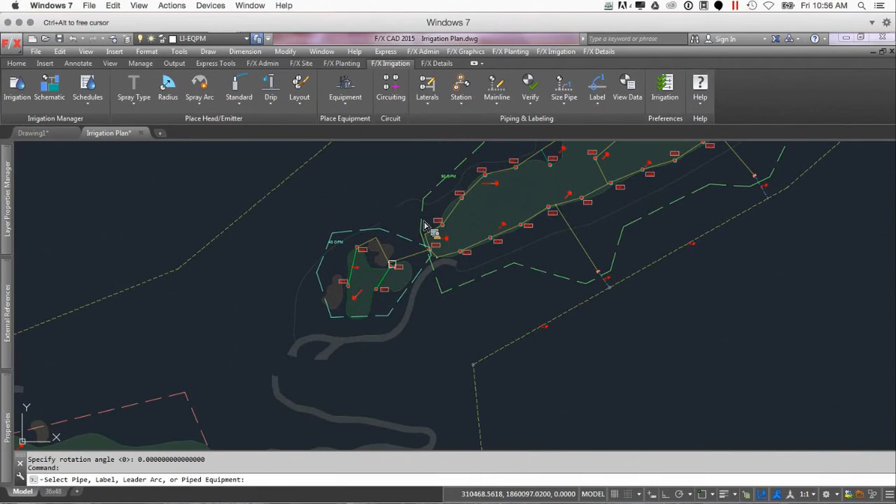So just like everything else, we have all of our different schedules. Being able to run our regular irrigation schedule is going to list out - we even have our schematic irrigation so we can see how much that's putting out. It's listing out all my different valves and head rotors that I've got in the system, along with a broken down version of those pipe restraints that I've actually placed on my lines. So that's pretty nice - again, our POC, and then our pipe breakdown for sizes. So there's that.

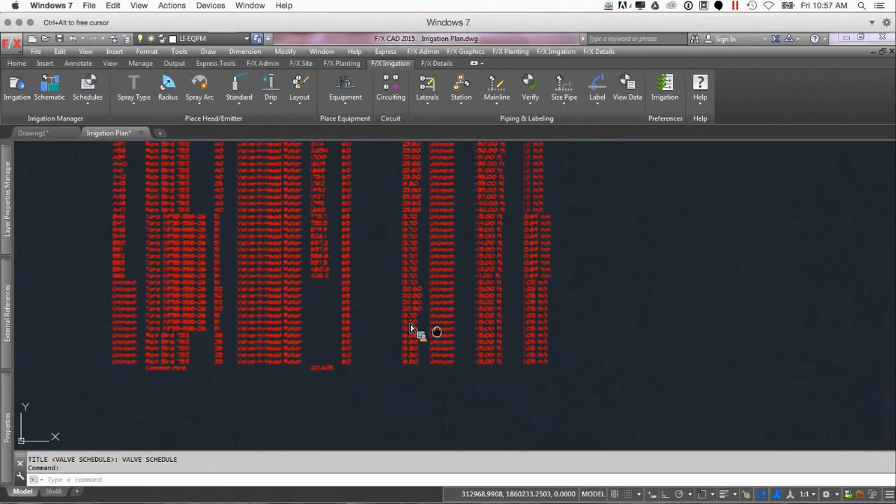Our valve schedule is super helpful for troubleshooting, let alone just great information. You're going to be able to pinpoint a lot of maybe issues that you have here where it says these are unknown valves - those are the ones that I haven't labeled yet. So being able to pinpoint right where there's some issues, if you don't see a precip rate for some reason, or if you don't see a wire length for some reason, there's definite troubleshooting ability right within this thing.

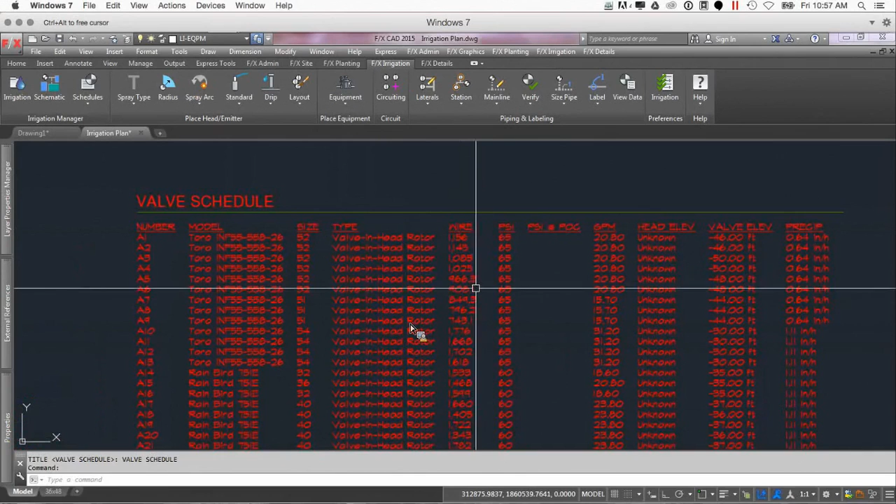So again, we've made this really nice in that it does recognize the closest controller. So if I have a set of everything that I want on my A controller, it's giving me that wire length from that head, shortest route over to that controller. And then my B controller is right here, so you can see these lengths are a lot shorter than the rest of the A controller. That's because my B controller is chilling over here pretty close to all of their heads, versus the A controller where I've got heads clear over here and my controller is right down in between them all.

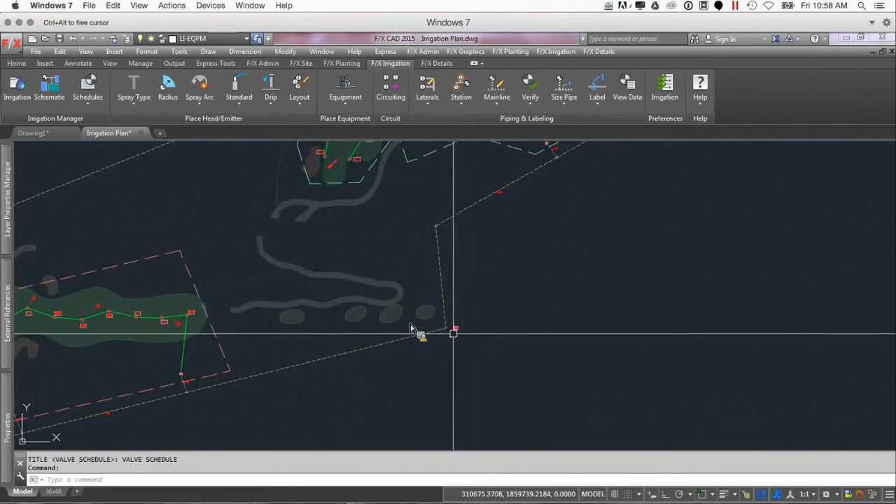So there's definite improvement that we're focusing on, in how it knows what controller to hook it to. But for now, being able to have that ability to get that quick snapshot is definitely something to not really shake a stick at.

So the last one we want to really focus on is this runtime schedule - given different programs, the descriptions, how many stations you're going to want at a time. Again, the system's going to be really acting as if it was a smart controller in this realm, and it's going to allow you to set whatever the parameters are for that. So I've already determined that I want to be able to put down 0.28 inches a day, so roughly 2 inches a week.

And I want that to be the determining factor here. I'm going to say 10 stations at a time, but it's going to really go through and look for different combinations for that. So I'll hit summary here and place it in the drawing.

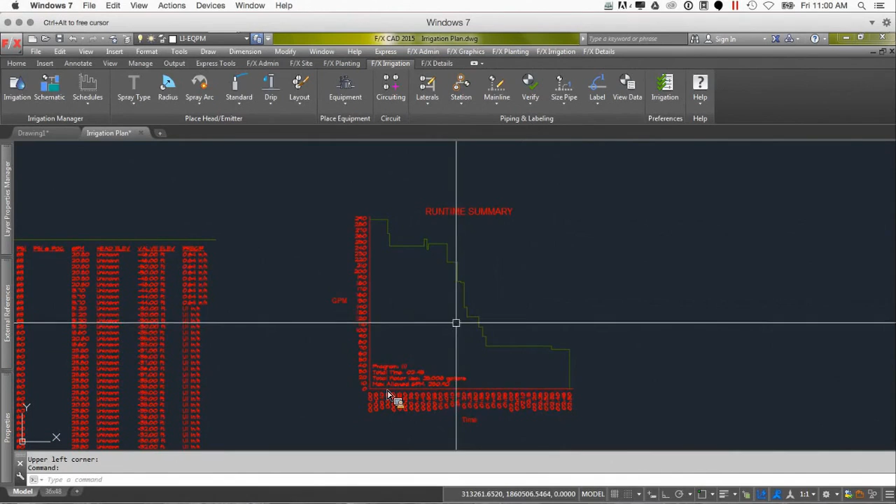Especially when you're dealing with pumps and stuff like that, you really don't want this fluctuation and dragging out over this amount of time, or on and off type of thing for that pump, just wear and tear on it. So the more consistent you can have things running, and then finishing out, is obviously ideal. But you can control that with the types of heads, the mainline size, and the different combinations of valves.

So, Jerry, unless you want to give the description you gave me earlier today, this is our runtime schedule that lets us know how long it's actually going to take to water.

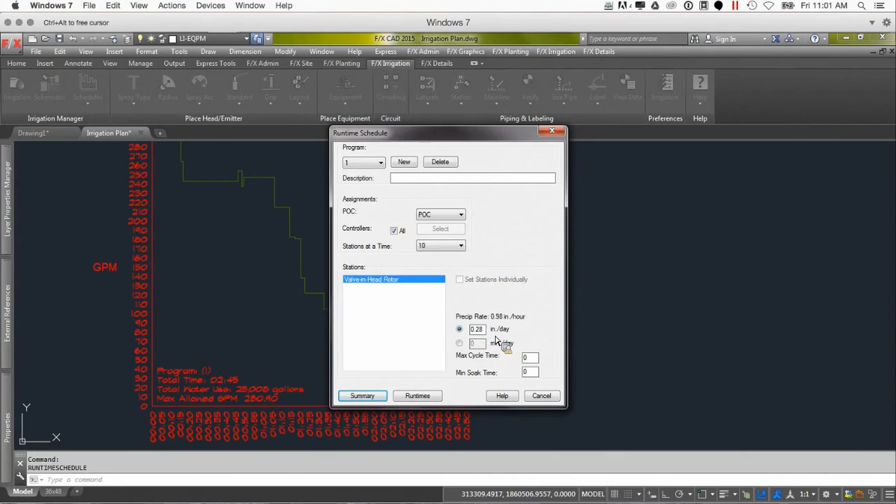Yeah, and if this was your finished product, for instance, you would probably immediately want to, because obviously something's going on at the end, look at the run times and see what's happening there, because that's just trailing on too long.

What you could do is go to the end and see which valve numbers are taking so long at the end. And what it basically is, of course, is just a matter of how they're piped.

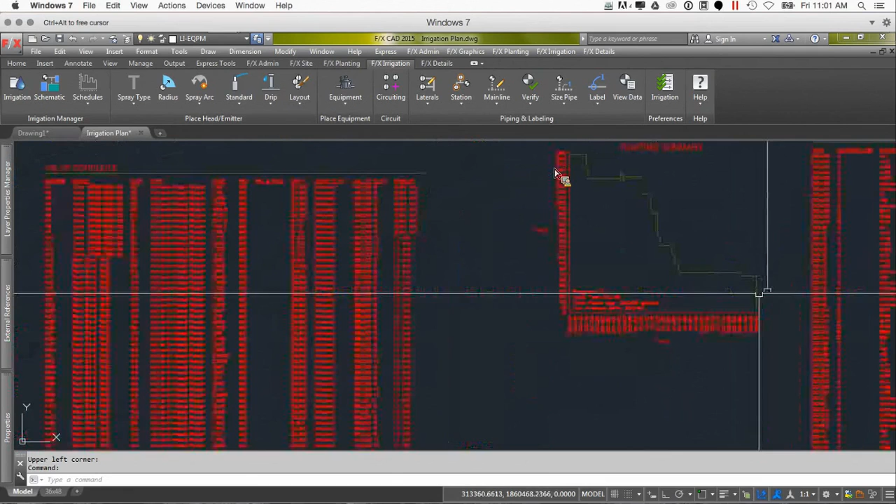So now you can see, okay, it takes a long time for it to cycle through all of those heads. And that's just, either you're going to need to accept that long of a watering window, or if that's too long, you're going to need to maybe consider upsizing the pipe.

Because that's going out however many hours, and as an analysis of that kind of runtime curve, what you're supposed to notice is that it starts out pretty good, you're really maximizing your flow, but then those ones in that fairway are just effectively taking too long. That's not optimized. Maybe need another entry point or something like that.

Right, so yeah, the final one, like Joe was saying, the runtime schedule. It's definitely going to go through and do a breakdown of what controller will be running, and at what point things start switching and turning on and off as you go down, so you can get a sense of how it's really coupling these things together.

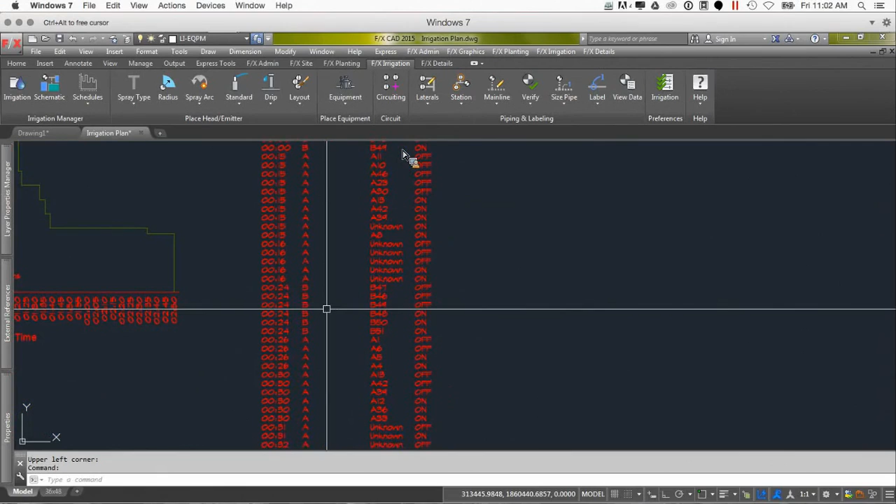This was always the most confusing part to try to put together, which is awesome. The complexity and the thought that went behind it, as Jared was explaining to me, is the way it looks for things and starts turning stuff on, then goes through all the different scenarios, what flow zone it's in, how much flow is left over in that zone, and can it add another head onto that without breaching that flow zone, and where to look for it.

So it does go through, and it does couple it and combine it with instances as it starts to go through. So it does a pretty stellar job.

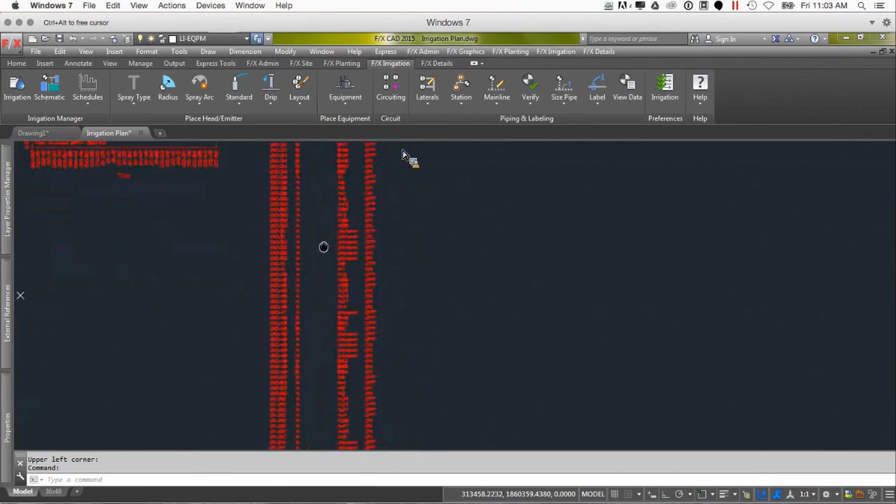So with that, I think we're at our time, and that's all we had planned to show, unless there's any last questions.

So yeah, no, I was able to get the little questions answered there. Like you said, that feedback of getting spot elevations in an XREF, great idea. And the other one that came in was possibly putting the XY coordinates in the valve schedule. Might help for maintenance or geolocating. I thought that was a really good idea. Cool, anyone else?